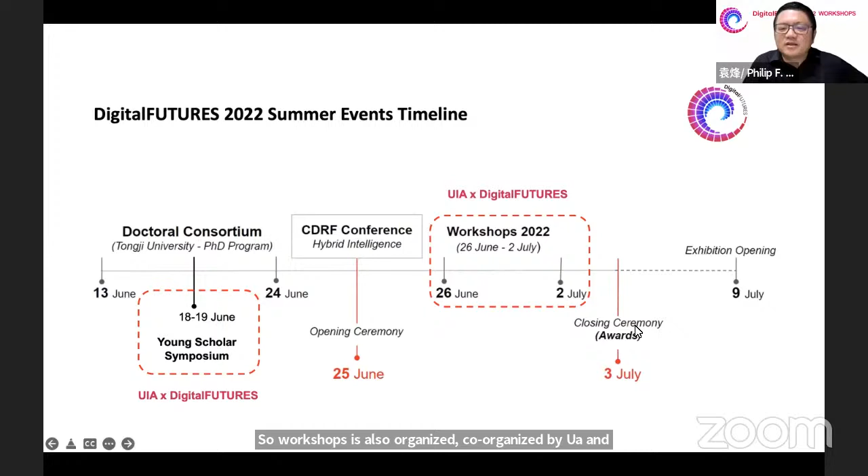So tonight is the closing ceremony. We will announce the DigitalFUTURES Awards, yearly awards, tonight. So this is the number of workshops we organized. We have more than 130. It's 133 workshops around the world, more than 320 instructors from 28 countries and 115 institutions.

So the most special thing this year, actually, we invited different coordinators based on different language channels, including English, Chinese, Spanish, Portuguese, Arabic, Turkish, Japanese, Korean, and so on and so forth. So we have 12 language channels. So these are the volunteers and the organizers. Actually, I would like to firstly thank them for their contribution. So we have English, Chinese, different languages.

So including a lot of familiar names, young professors, architects. I would like to thank them a lot for their generous time and contribution to all the events. And also the organizers, we would like to thank all the officers, including the administrative officers from different universities, different continents, organizer, officer, outreach officer, communication officer, webmaster, conference officer, secretary, treasurer, award committee, and publication committee as well. So thanks to all of you. Without your contribution, there would be no DigitalFUTURES.

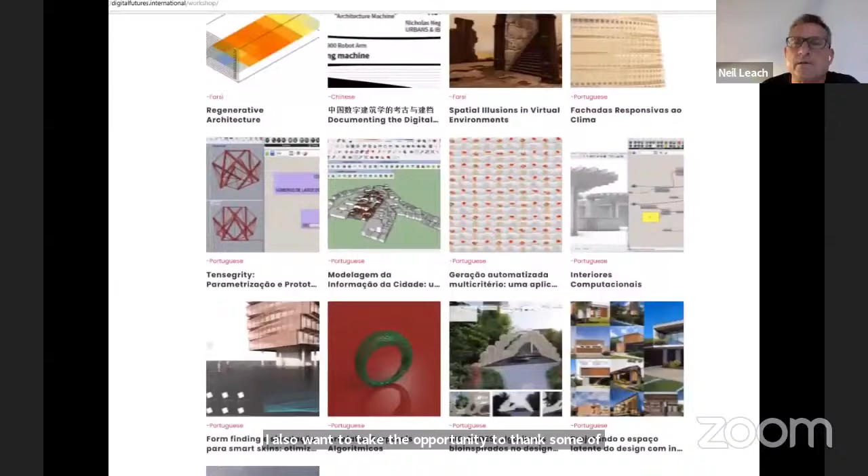I also want to take the opportunity to thank some of those who have been involved in this process. I probably risk leaving out someone. It's always a risk, but I do want to highlight those individuals who have really made a huge contribution to this. The main Digital Futures group has been working on this since January. It's a group that's like the United Nations, it's from all over the world.

And I just want to single out, first of all, three kind of central figures who have been part of everything. Virginia Melnick, who is currently a researcher at the University of Michigan and also doing a PhD at Tongji. She is a veteran, shall we say, of many campaigns, and Virginia is really absolutely central to all the things we've been doing. She's also been interviewing as part of our Legends series. She's interviewed Denise Scott Brown and also Odile Decq, and next week it'll be Liz Diller.

I also want to thank Gustavo Rincon, another one of the three key figures. Gustavo has been central to everything. He's a graduate of UCLA, and he's just finished his PhD at UC Santa Barbara. And it's his enthusiasm and dynamism and optimism that has been really carrying us throughout the year. So thank you, Gustavo.

And the third key member of the triumvirate, as it were, in charge has been Bhavleen Kaur, who's new to the team. Bhavleen is an assistant professor in Mumbai in India. She's also about to start the Doctor of Design program at Florida International University. And Bhavleen in particular has been responsible for setting up our tutorials, a most important part of this last year's activities.

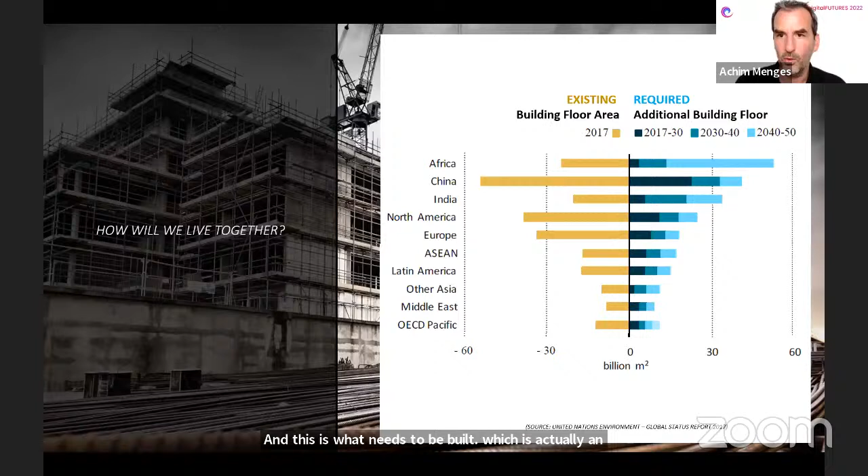What you can see on the left is the UN statistics for buildings existing on the planet today, which amounts to about 230 billion square meters. And this is what needs to be built, which is an interesting statistic also when we look more closely at where these things are going to be built, but there's still a large share in the so-called developed world, but of course also across the globe.

So if we bear this almost unimaginable volume of floor area that needs to be realized in the next 30 years, 230 billion square meters, in mind, and we realize that more and more of the detrimental environmental effect that building practice has on the planet is in the construction process itself, so in building construction and not building operation, we think that we need radically different models for how we build.

And this is what we intended to reflect on with Maison Fibre, an alternative model for how we can, on the one hand, accomplish this grand societal challenge of building a lot in a very short amount of time with a different model of design and construction, which is based in biology, where we see very different ways of building based on principles like morphological differentiation and anisotropic materials, and of course, the integration of form, material, structure.

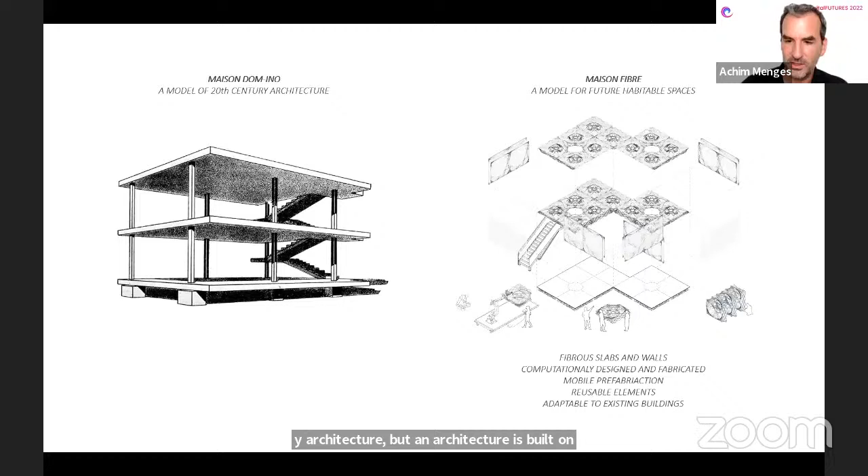We have investigated that for many years across many different projects. So we see Maison Fibre as a development step in this long lineage of investigating fibrous tectonics and fibrous construction. But what we were really interested in this time is not so much designing a project, but designing a model. In the same way that we can say Maison Dom-ino was a model for 20th century architecture, but an architecture that is built on concrete construction, with isotropic materials, with no morphological differentiation.

Maison Fibre was meant to be a model for rethinking this, and also as kind of stimulation. So by no means is there a claim that we will solve these big challenges with something like Maison Fibre, but we urgently need alternative models, and this is what we wanted to provide as a stimulation for the audience.

One aspect that is critical, of course, is that we utilize digital technologies to enable this. So the entire project is actually based on a very humble, small robotic platform that could build a human habitat in a very short amount of time, based on a kind of differentiable module that then is basically designed to become a habitat.

So what we did for the Biennale was basically just covering the same floor area as Maison Dom-ino, but integrating the existing building stock of the Arsenale, these two big columns, as part of the load-bearing structure, also acknowledging that, of course, building stock and the extension of building stock is an important future aspect. And then we showcased how dealing with fibers, you have to design every single centimeter of the more than 150 kilometers of carbon and glass fiber that are in this project.

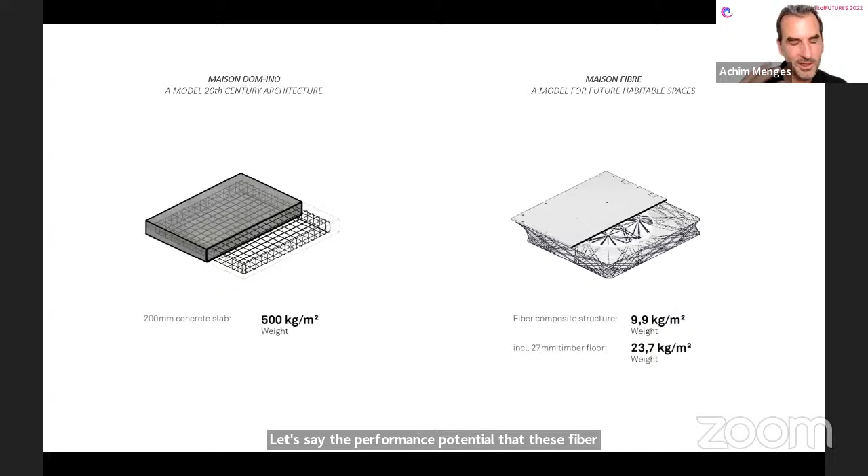Maybe just as a quick summary, what we can also see is that with this different model of constructing, we can actually build 50 times lighter than the role model of the 20th century. And of course, that's the kind of improvement that we need in order to tackle those societal challenges. So 20 times, 50 times lighter, less material. And I think what you can see here is that really it's a truly fiber structure. So all the floors, everything is only built from fibers.

And the most important aspect is, of course, that this is not only a technical accomplishment, but it's also, I think, heralding a new material culture that is very different than the 20th century architecture that celebrated an aesthetic that is based on a very different logic of isotropic materials.

So here you can see Maison Fibre in the Arsenale, the two stories with the two cantilevering sides. There was, of course, a fully inhabitable upper floor, which also housed our material culture exhibition that you can see here on the left. And the main idea was actually to stimulate the visitor's mind to a radically different way of building, also basically putting the walls in the central doorway that actually carry the upper floor, to give them the importance that we feel they had for this project.

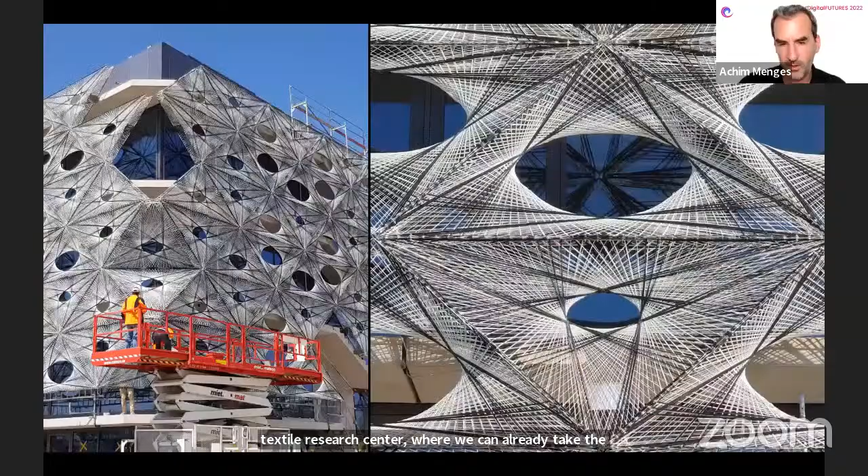So with this, I would like to wrap up this short presentation. I think what is really interesting for us is also that this model was truly instrumental in, for example, a building that we're currently realizing, which is a university building, a textile research center, where we can already take the next step of implementing this innovation on the full scale. This is currently on site and will be finished actually this October.

So thanks a lot for awarding Maison Fibre the award. We are truly honored by this, and I would just like to wrap up the presentation by a very short video, which is a bit more atmospheric than what I could deliver on a Sunday afternoon. Thank you.

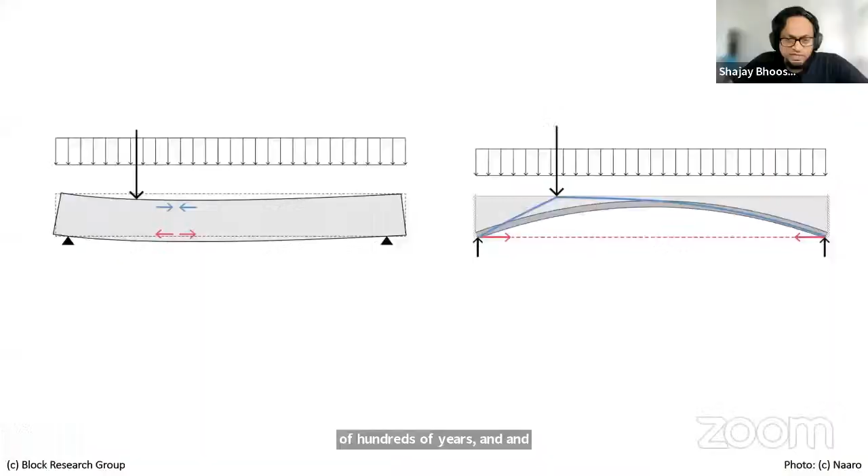We probably don't think of ancient masonry structures as high performance structures. In fact, they're extremely high performance and high endurance, evident by the fact that they've lasted hundreds of years. Philippe Block and the Block Research Group have been pioneering the adaptation and extension of these principles of masonry design to meet the challenges of the construction industry, particularly conservation of material. They've shown time and again that by including these geometric principles of masonry design and upgrading them through computational design, we can go a long way in reducing our material footprint.

Striatus tries to extend that principle to 3D concrete printing. In other words, Striatus is a masonry structure with artificial stone, or 3D concrete printed blocks, seen as artificially printed synthesized stone. And of course it incorporates some of the ancient techniques of stereotomy, and it's aligned with the history of Venice and all the arch bridges of Venice.

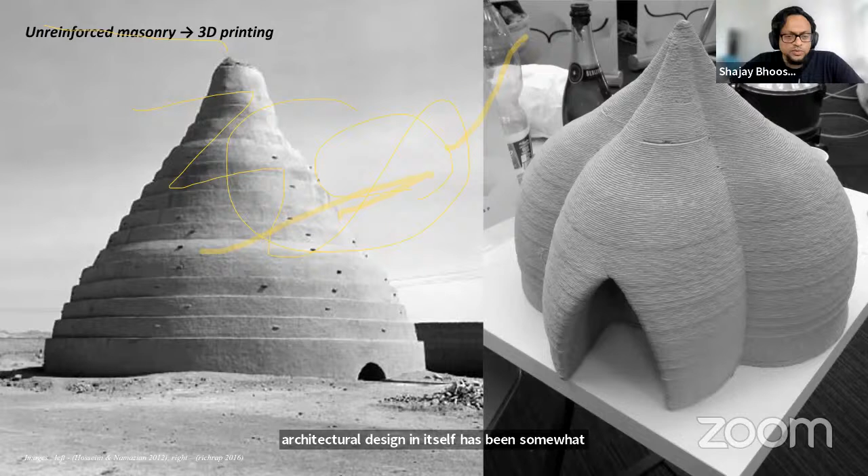So that's another aspect we wanted to address, that unreinforced masonry can be used as a deep analogy to 3D printing, in the sense that masonry is basically additive manufacturing with large scale blocks. And so we can think of 3D concrete printing as a kind of miniaturized masonry. And more importantly, we can also adopt and adapt techniques of design and construction from masonry to 3D concrete printing.

And in particular, in this project, we wanted to adapt so-called pitched brick or tilted plane masonry, and the way they have developed spatially coherent blending of brick courses, each course slightly different from the previous, thereby giving us the curvature. And also these historic techniques of cross-vault construction, which also rely on inclining the plane of laying the brick courses, each course being slightly different from the previous one.

And so these are the background goals that we tried to integrate into a kind of coherent computational design and construction pipeline. And there were three particular frameworks that were constantly in interaction. One was the Compas framework from the Block Research Group for structural design and structural evaluation and so on. And our own framework at Zaha Hadid Architects, called Z-Space, and Incremental3D. They had their own framework for developing the fabrication side of things. And these three were seamlessly always in communication with each other.

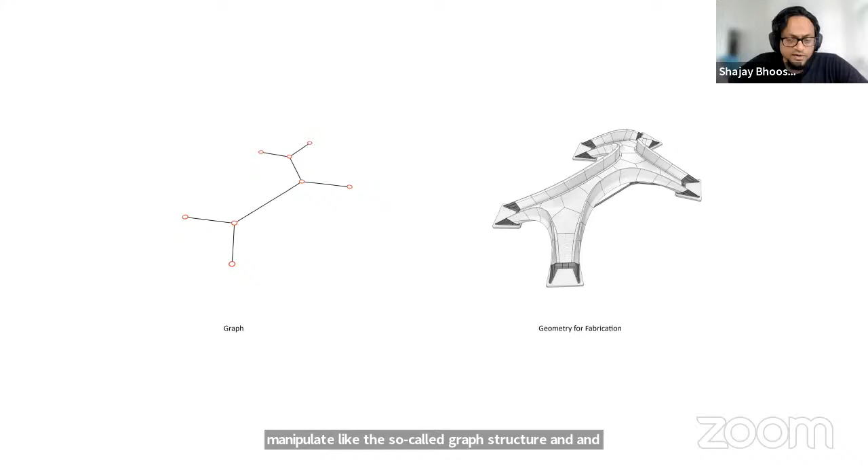So the project was executed over 6 months in the height of COVID restrictions, and the project teams never actually physically met until the project was completed. And so that's another feature. And what we wanted to set out was a design and fabrication friendly framework. So the designers are free to manipulate the so-called graph structure, and all the things needed for construction are carried out in the background, including the stereotomy and preparation of the 3D files and printing files and so on.

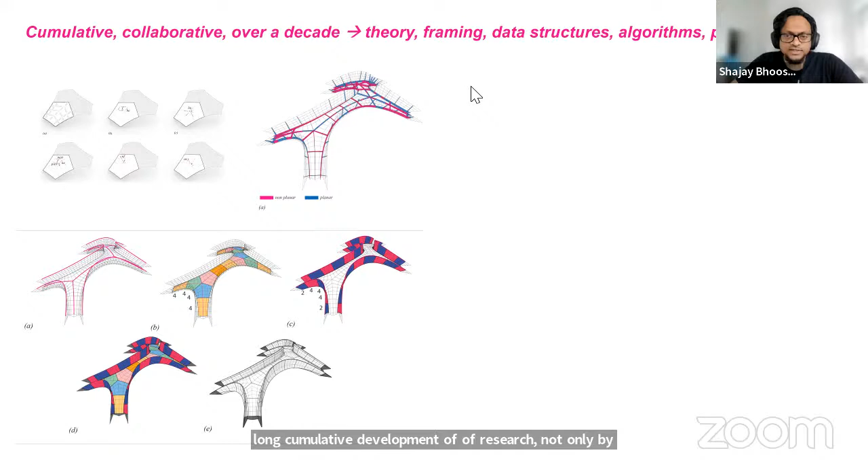And the first and foremost of this is, of course, Philippe Block's seminal thrust network analysis PhD from MIT in 2009, and several others that came after that. And also an important seminal precedent is the Armadillo Vault, as I previously mentioned, and also the PhD dissertation of Matthias Rippmann, which was very, very influential in the development of RhinoVAULT and everything else that came after that.

And to that, we also made some humble contributions, first and foremost identifying and articulating the relevance of masonry to 3D concrete printing, and also developing some new methods borrowed from the field of so-called optimal transport, and then using that to create spatially coherent print path generation and other such incorporation of

printing constraints. And likewise, the structural design, evaluation, and verification in itself is another long list of prior work that contributes to the success of this project. And similarly, also for 3D concrete printing, material testing, and so on.

So just on the shape design aspect, again, to reinforce, the key innovations have been to have this masonry logic apply at two different scales. One at the scale of the block itself, that they are arranged in a compression-only layout. And in addition, to align the print paths as orthogonal to the force flow or expected force flow as

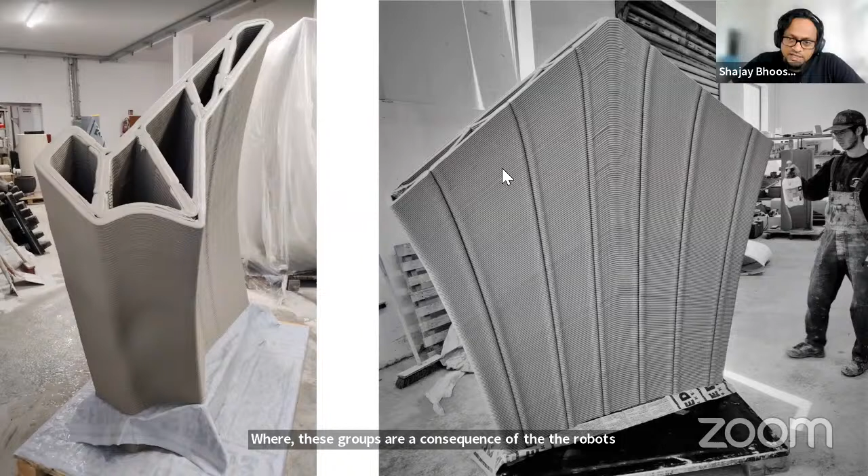And in addition, it also gives us this striated language where these grooves are a consequence of the robot slowing down to make a turn, and all these inclined planes are also precisely calibrated to be able to align the material perpendicular to expected force flow. And so this also gives us the striated tectonic.

And to achieve that, there's some amount of resampling and innovation needed at the print path generation. On the left here is what would happen if we just naively cut up a geometry. And on the right is when we calibrate and coordinate every layer to every other layer, where the printing starts and where it stops, etc.

So in conclusion, the project is a kind of homage to a collaborative design mindset, where multiple stakeholders, engineering, construction, fabrication, design, all come together at the early stages and remain collaborative all the way to construction. And this is, we feel, an important contribution to the discourse, that we are building bespoke tooling,

not focusing on the existing tooling, because that one is focused on a 20th century way to produce architecture, which relies on drawings and so on. And it is not at all aligned with digital design nor robotic fabrication. And more importantly, everything is white box and fully transparent, and it is collaborative precisely because it relies on a common language of geometry and code, and not only on numerical calculations.

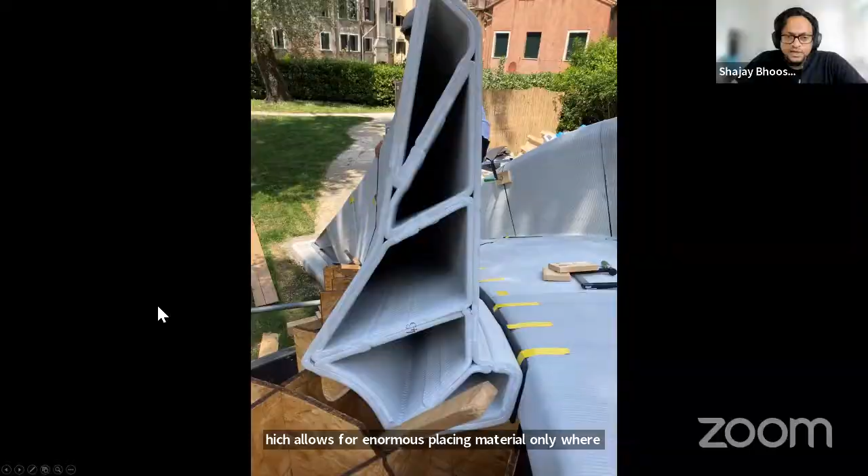And likewise, we want to combine these ideas of funicular shape and appropriate stereotomy and the striated language with 3D concrete printing, which allows for placing material only where it's needed, to be able to realize some of these goals of circular and sustainable design, such as reduction of material, reuse of the printed blocks and recycling

of them. In fact, this bridge has been fully dismantled and crushed, and the same material is being used as a source for the next batch of printing for the permanent bridge, which will be located in Lyon in France. Again, we are hoping to complete that by the end of October.

So this is the disruptive outlook that we hope to enable through this prototype bridge that we showcased in Venice in 2021. And I will leave you with this video, which summarizes some of the contributions.

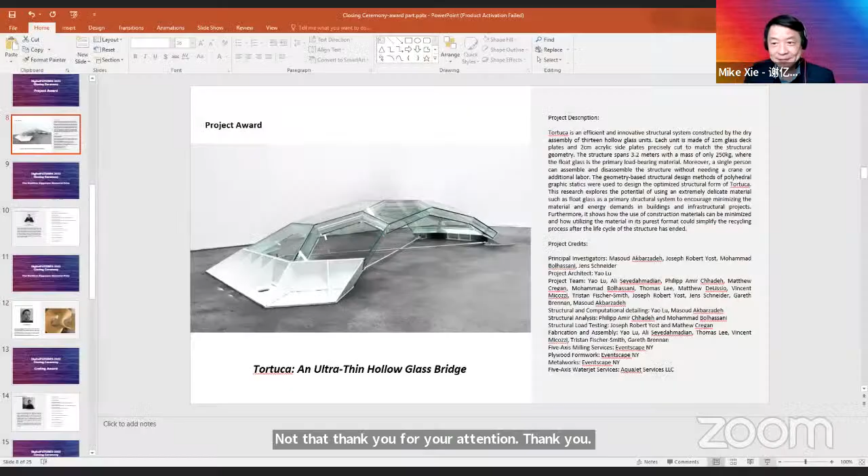The third award-winning project is entitled Tortuca, an ultra-thin hollow glass bridge. This is designed by a team led by Professor Masoud Akbarzadeh. May I invite Masoud to make a short presentation.

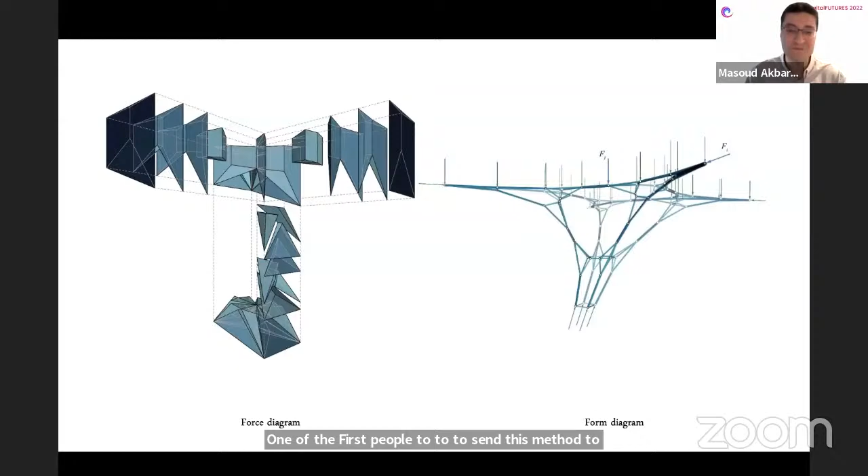Next, please. So we have developed multiple techniques and methods that allow us to design the force flow in three-dimensional space and distribute the construction materials using these force flows to create a variety of different spatial structural forms. So in this case, we are working with the methods of polyhedral graphic statics that I had the honor to be one of the first people to extend to 3D at ETH Zurich under Professor Philippe Block and William Baker. Let's move to the next.

So we worked with different materials and tried different geometries. For instance, in this case, we have created concrete structures to show the efficiency and the minimization of the material. Next, in this sample, we showed how a 12 kilogram concrete structure can take around 24,000 kilograms of load, which basically proves the efficiency of the method and also the type of structural system we work with. Please, next.

Yes. So we tried to apply this method to various structural systems and work with a variety of different construction techniques. For instance, in this case, this is a node-based assembly. It's a compression body held together with the tension ties at the top and bottom and the self-weight of the top glass structure that keeps everything in equilibrium. But also we investigated a lot into the methods of assembly and the connections of these systems. In this particular case, the relative density of this structure is very close to the relative density of human bone, to show how you can efficiently distribute the material in three-dimensional space.

Next. One of the major projects we initiated in 2018 was this glass bridge. The project that has been selected for the award today is actually a proof of concept for this method of construction. So what was really at stake here was that we intended to use a highly brittle material like float glass. This is not a security glass, it's like a window glass. And the main objective was to eliminate any type of intermediate material like steel, and just use pure glass to transfer the forces. But most importantly, we wanted to significantly reduce the self-weight of the structure.

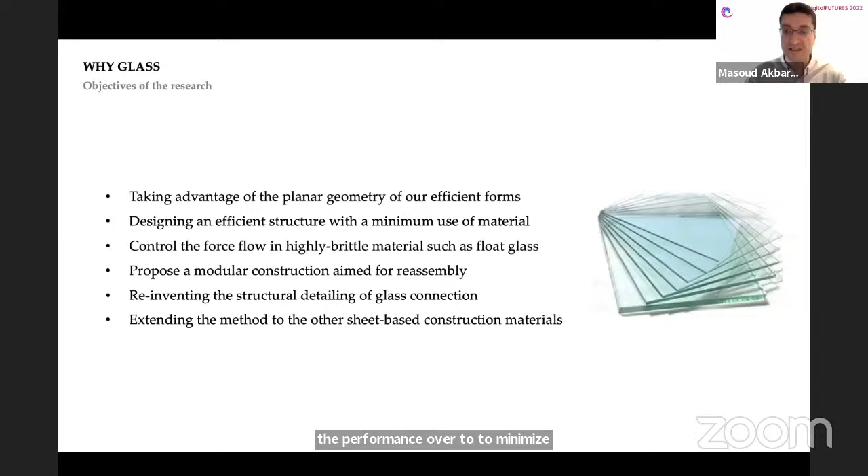Let's move to the next. So one of the main challenges that we had was that because we were rethinking the method of construction, the way that these materials should work together, the way the glass panels, those really thin 1 centimeter glass panels, are going to be put together to create a construction module, we did not have any understanding about the mechanical performance of our building units.

And also there was not a very, I would say, well-known numerical workflow to validate the experimental results. And we did not have any research on fabrication, assembly, pre-made assembly techniques to move forward. So that, in fact, formed multiple stages or multiple thrusts of this research to begin with. And obviously, if you have all these things developed, we can actually move forward with the larger scale construction. Let's move forward.

So from here, I'm going to give it to Yao Lu, who is my second-year PhD student, and he can walk you through multiple stages of this research that made it possible to arrive at the point that we are today. Thank you, Masoud, for the introduction.

I'm going to take it over, and I'm going to start with providing some history and detailed context of this research project. So in one of our research papers, we proposed this construction module called hollow glass unit. And then we would like to learn something about this specific construction methodology. So this construction module is made of 1 centimeter annealed glass, just the regular window glass. And then all the edges are cut using 5-axis water jet cutting techniques.

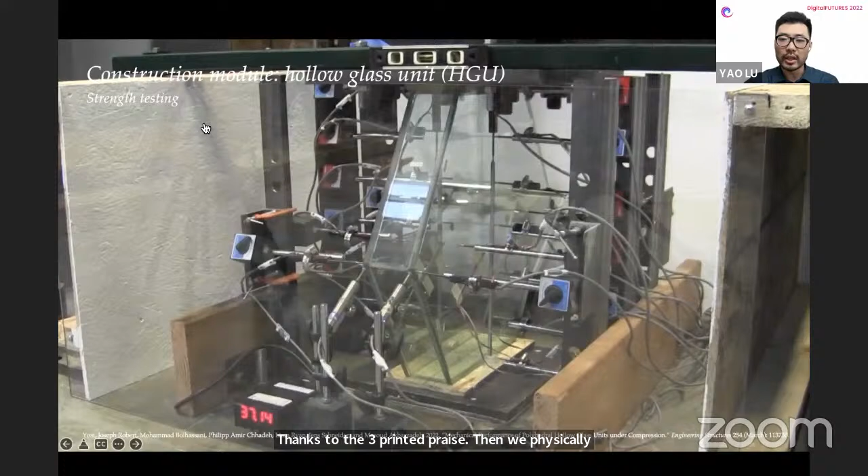And all the parts will be bonded together using 3M VHB tape. The assembly of the hollow glass unit could be fairly easy and precise thanks to the 3D printed PLA jigs. Then we physically tested the mechanical performance of this hollow glass unit, and it showed very impressive load-bearing compression capacity.

As Masoud just mentioned, we've shown that it's totally possible to make a 10-meter pedestrian bridge using this construction unit by leveraging the compression capacity of the hollow glass units. But we still need to deal with the detailed design issues, the fabrication constraints, and also the assembly logic issues. And therefore, we introduced this smaller scale prototype called Tortuca.

Tortuca is actually the Latin origin of the English word tortoise, and we hope this name could help us explain the design thoughts behind this project, not only because of the visual similarity, but also due to the lightweight and structural efficiency of this biomechanical structure.

So the design is achieved by polyhedral graphic statics. We first deal with the single layer funicular form. In this stage, we think about the topology, the geometry, also the rise of the bridge. And then we quickly move to the double layer bridge just by simply subdividing the force diagram into 2 layers. And after getting this base geometry, each of the polyhedral cells will be materialized into one hollow glass unit, which has a top deck plate, a bottom deck plate, and several side plates.

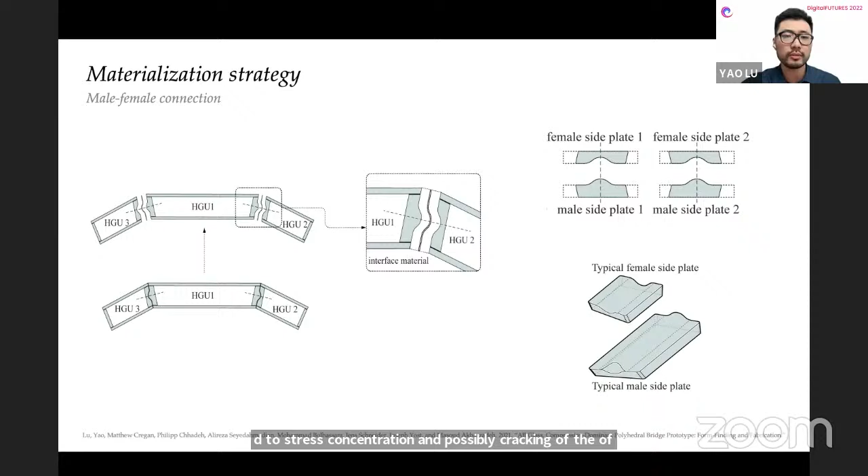One other key element in this connection detail that I want to point out is this little piece of plastic. It's the interface material between the neighboring hollow glass units. It's to separate the glass-to-glass direct contact, because the direct contact between glass will lead to stress concentration and possibly cracking of the glass part. And here is the test unit that we made, and you can see all the side plates are made of cast glass and 5-axis water jet cut.

There are several issues that we have found through this testing process. First of all, the whole casting process is very energy and time consuming. And more importantly, it doesn't perform well because some of the connections will open up under asymmetrical loading conditions.

And therefore, we shifted to another improved connection detail called butterfly locking mechanism, which is also what we used for the final construction. It has a locking strip made of acrylic, and also the channels on the 2 hollow glass units that it is trying to bring together.

So the side plates with the channels will be very difficult to make using cast glass and water jet cutting. So we decided to use acrylic and 5-axis CNC milling instead of casting. And as always, we bound all the parts together using the 1 millimeter thick 3M VHB double-sided structural tape.

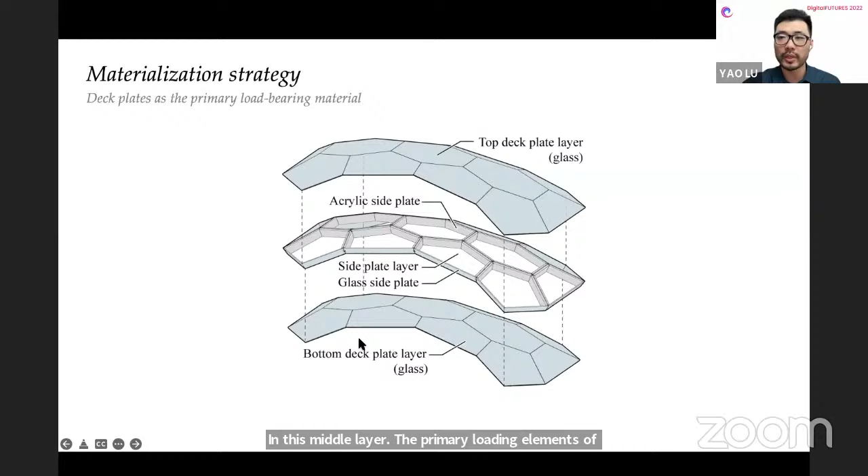Although we introduced some acrylic parts, as you can see in this middle layer, the primary loading elements of this whole structure are still the 2 continuous layers of the deck plates. Then we validated this improved connection mechanism using a simplified numerical model, and it showed clear improvements. The entire structure was also simulated under its self-weight, and the maximum deformation is below 0.3 millimeter.

Here's an image that shows the detail of the locking mechanism, and this locking strip can be removed during the assembly just simply by a small metal hook. Here is another image that shows the locking mechanism with the interface material. So the compression coming from the deck plates will be passing through this interface, and therefore the material selection of this part will be very critical.

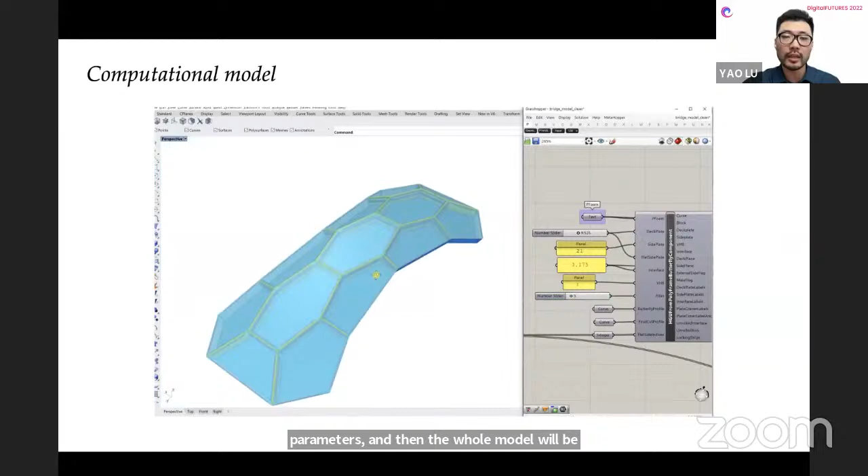Before moving to the fabrication, we also implemented this parametric model where we can change the design parameters, and then the whole model will be updated instantly. It helps a lot with the design adjustments and also fabrication management. Here we have a video that records the entire fabrication and construction process.

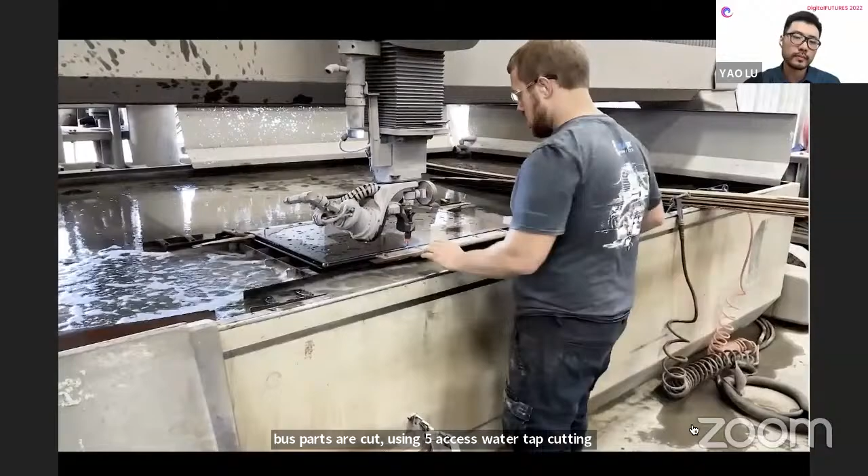All the glass parts are cut using 5-axis water jet cutting. The water jet cutting can be fairly precise, and according to the fabricator, the error is below 0.1 millimeter.

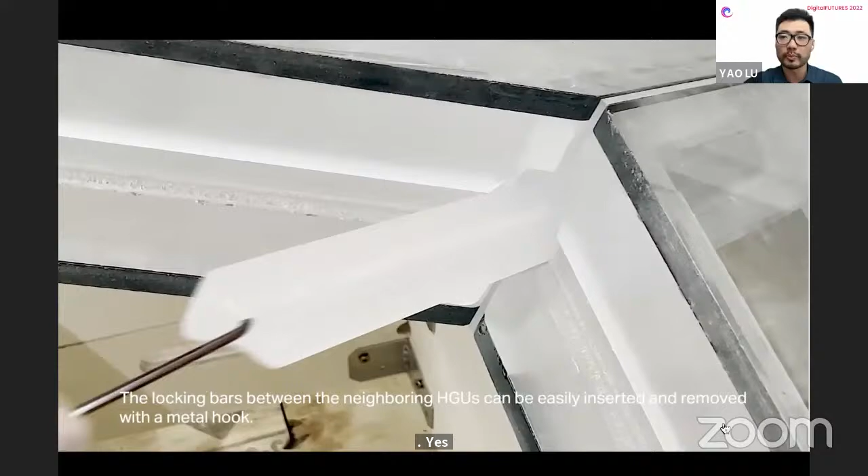The construction of the hollow glass unit can be handled by just one person. And here we're actually showing the largest module in this whole bridge, and it weighs about 30 kilograms and can be easily handled by one person. The assembly of the whole bridge can also be done just by one person due to the lightweight of the whole construction system. After all the units are in place, we can start removing the formwork, and the structure will be standing on its own.

Okay, as a conclusion, we made a lightweight multi-layer funicular structure using 1 centimeter thick annealed glass. And this proposed technology not only works for annealed glass, it can also be extended to almost any other sheet-based materials. The modular construction allows for easy disassembly and recycling of the structural materials. The lightweight construction allows minimized labor, formwork, and their costs.

And last but not least, this project is still a work in progress, and we will have some physical testing at Villanova University in the facility of our collaborator, and we'll be happy to share any engineering data once the test is finished. And thank you for your attention.

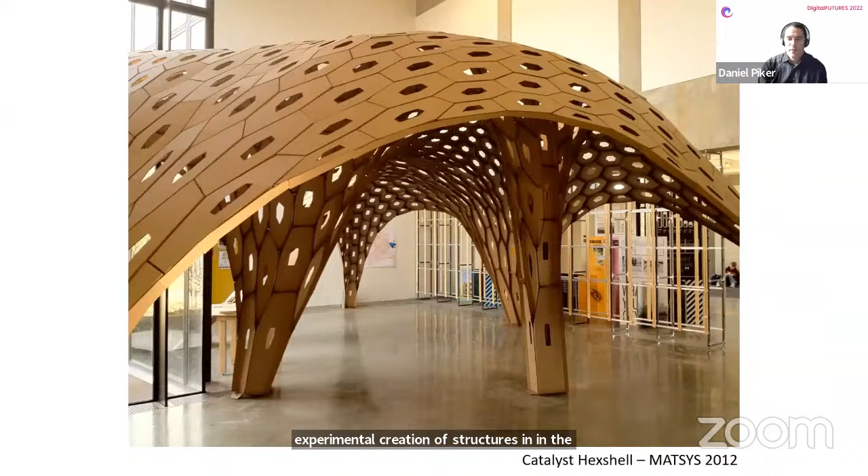And form finding has a long history, obviously, from before computers, in the work of people like Gaudi and Isler and Frei Otto. And the intention was to enable some of the same kind of experimental creation of structures in the computer. One of the very first applications of it was in funicular and catenary structures. But over time, the remit of it expanded a bit to tensile structures, one of the classic applications of form finding. These are early examples of use of it from the community.

And as time went on, I continued to develop and try and improve these tools, sometimes getting as close as possible to real world physical simulation. And I was always drawn to the more playful applications of this. This is an example of combining tensile and inflatable structures.

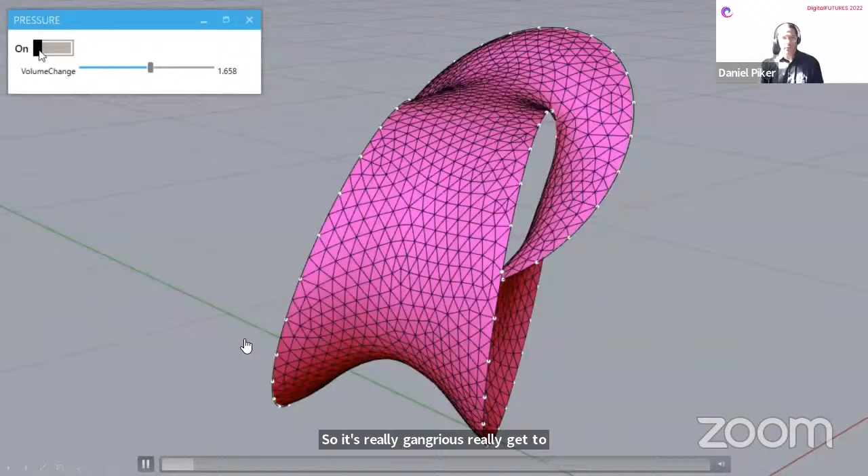And the importance of form finding really is that when we set out to design a shape in the computer, if it's something that involves large deformations like an inflatable, you can't just say, here is a cube and I want the balloon to be a cube. You have to design in interaction with the physical shaping processes. So Kangaroo is really geared towards enabling that kind of real-time or near real-time feedback as you shape the design. In some ways, similar to what would happen with physical models, but also extending it in digital ways that aren't always possible, aren't always convenient to do in the real world.

So yeah, bending simulation was actually one of the very first things before Kangaroo was Kangaroo. It started as an exploration into understanding bending behavior, particularly drawing on the work of Chris Williams from Bath and his work on dynamic relaxation. And this has led to the approach used in Kangaroo and applications to actively bent timber grid shells, in this case a project in Romania with some people from Bath University.

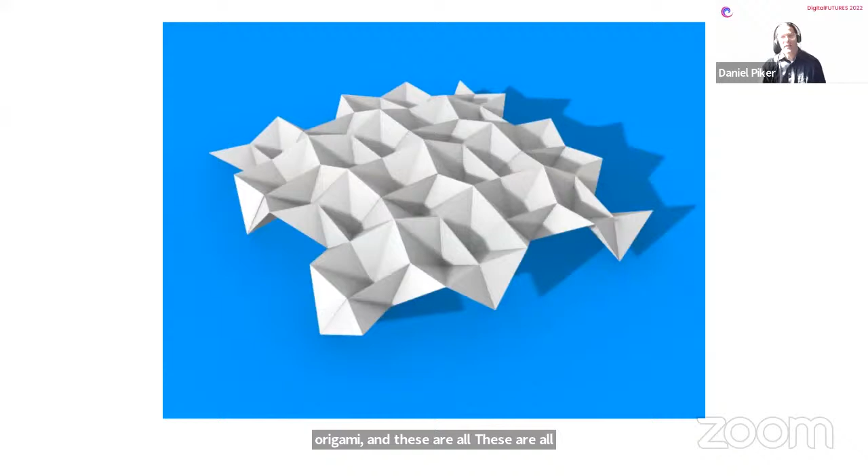And from there it started to diverge a bit more from the classical applications of form finding, extending to things like origami. These are all different systems that can be approached through an energy minimization process. I did some work on this for a company called RoboFold, who at the time were using robots to fold sheet metal. Origami is something that's very easy to do by hand, but to repeat that motion on a large scale with the robot, we needed to be able to simulate it in the computer.

And this interest in working with sheet materials has continued. This is some more recent work with developability. This is based on some relatively new research on taking meshes and turning them into developable surfaces. So it was taking a mesh in Kangaroo and developing an energy for it, which adds creases and flattens areas in order to make it something which can be made out of flat sheet material.

Also, as the stability and speed of the solver was increased, I found it was possible to apply it to constraint modeling in the sense of mechanical models, because it can still be seen as an energy minimization system. And if you can converge fast enough, you can maintain the rigid parts and their connections to each other. This is an early demonstration of those improvements in the solver.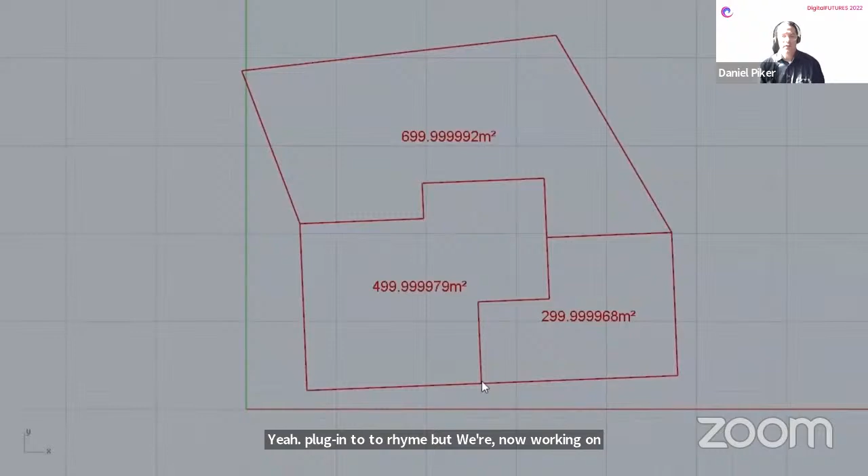And work is continuing on this now at McNeel. What you see here is in Grasshopper, which is the parametric plugin to Rhino, but we're now working on adding these types of constraint solving into Rhino itself, so it's usable for more drafting type applications.

Also, in terms of fabrication, often it's important to simplify geometry to something which can be more easily manufactured. One of the early examples of that I worked on was planarization, taking meshes which have faces which are twisted and turning them into flat panels that can then be fabricated out of glass and steel, for example. Some of the earliest adopters of these tools have been students and people making pavilions, and there have been several nice examples using Kangaroo.

But it then grew and has been applied in larger scale architectural projects, like this work by Thornton Tomasetti for this stadium, which is now built. And at some point in this journey, I joined Foster and Partners in the specialist modeling group. This was one of the first projects I worked on there, planarizing the panels in one small part of this. It wasn't that the whole thing involved a lot of form finding; there was just one area where we simplified the fabrication through this planarization process.

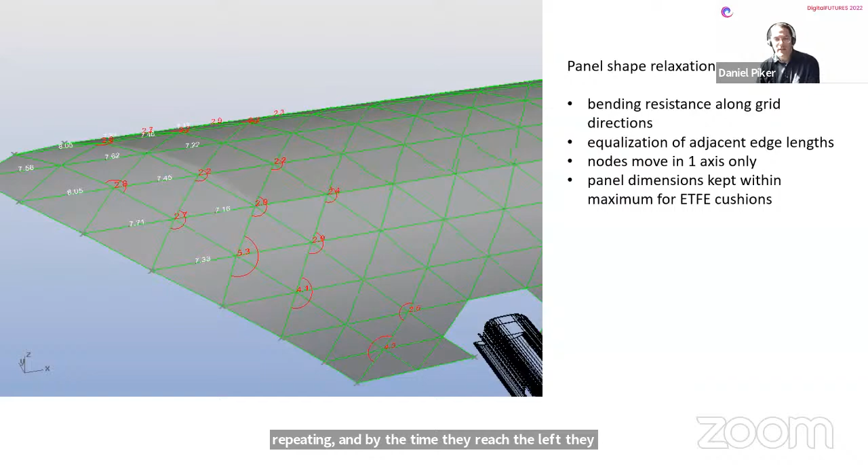So the triangles on the right side of the image are repeating, and by the time they reach the left, each one is different from the one next to it. This was done through a process of setting these constraints and minimizing an energy based on the angles, so that we could stay within the fabrication constraints for the ETFE and also manage a smooth transition.

A more recent project from Foster's shows a typical application where we would use Kangaroo: panelization, making facades and roofs, in this case again with planar panels, and managing smooth transitions between sometimes challenging boundary conditions.

One of the things I've most enjoyed is that it's been applied in a huge range of fields, far beyond what I ever expected, even by people outside of architecture. This is a recent preprint paper from biology where they used Kangaroo for understanding some of the behavior of kidney growth. More examples of its use: this same idea of taking challenging curved or complex boundary conditions and making something which seamlessly and smoothly interpolates between them.

One theme I've returned to many times is circle packing, which is used in quite a broad sense. There are many different types of circle packing, one of which was quad-based circle packing with tangent circles. I tend to try and follow the latest research, and whenever there's some geometric property which sounds interesting for fabrication, I try and develop ways to include that as a new energy within the system.

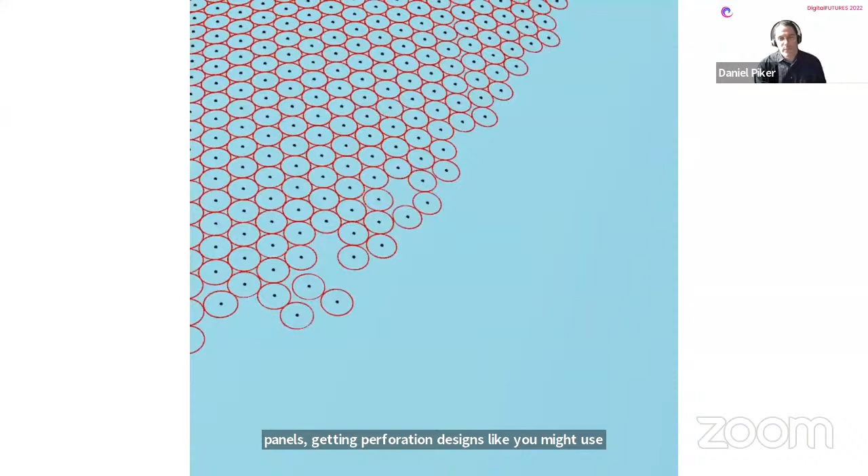And this is an example of where, although it's physically based, you can abstract it and add constraints or physically based behaviors that you wouldn't necessarily encounter in the real world. So here there's physical collisions between those circles, but also maintaining given symmetry constraints. So you can say, I want to distribute these points with the symmetry of a cube or an icosahedron, and also have them non-overlapping.

So this was actually an exercise in looking at golf ball dimple designs, which turn out to be surprisingly more complex than you might first imagine. They're not all just subdivided icosahedra. Yeah, this is an optimized version of an existing golf ball design, which has tetrahedral symmetry in this case.

So one of the aims in the form finding that I'm doing is often about finding, in a sense, canonical or ideal forms where the inputs of the designer, and in this case, the discretization used... When we relax the mesh, sometimes if we have a bad mesh to start with, then we can get a very asymmetrical result. So one of the other large directions of research I've gone in is improving the mesh independence of these results.

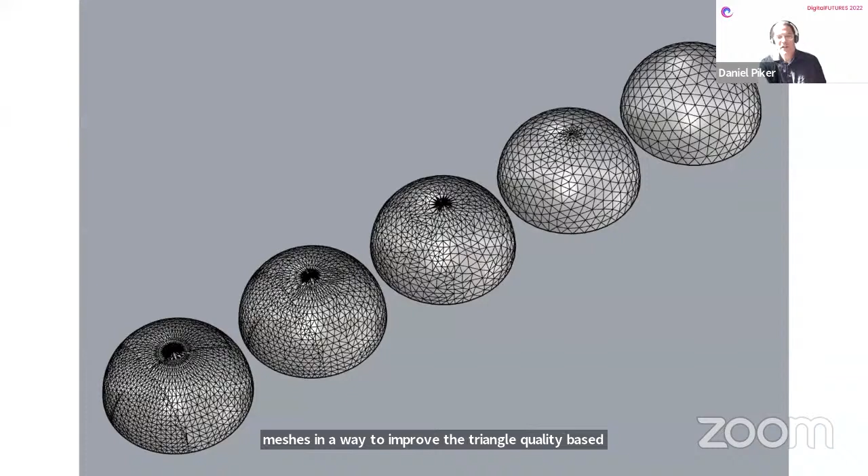So that's why I grew very interested in this idea of remeshing, which is about changing connectivity of meshes in a way to improve the triangle quality, based on these papers mainly. And that lets us take something like the mesh on the left and iteratively improve it to something like the one on the right, which has applications also for generating analysis models and other things.

But in terms of Kangaroo, the interest in it was that this enables much larger deformations, so we can change the boundary conditions much more dramatically than we could if we kept the connectivity of the mesh fixed, which has allowed this sort of thing. And in this example,

sometimes the results are surprising, and I always enjoy when form finding can give you results completely different to what you're expecting. So given a helicoid mesh, it actually turns out not to be stable, and it wants to jump to one of two different solutions. Or in this case, Costa's minimal surface, actually, if you relax it as a soap film, it will collapse and disconnect.

And then combining these themes of circle packing and remeshing, we can get circle packings which maintain their tangency and also adapt their connectivity at the same time.

So this idea of finding canonical forms, I think topology is one of the clearest examples of this. Like for a given knot, you can draw it in many different ways, but we can actually ask the computer to find what is, in some sense that we define, the best way of placing that topology as a 3D shape. So here the user draws something very roughly with the given topology, and in this case, it's finding an alternating crossing diagram for that knot, and then it relaxes to find an energy minimizing form.

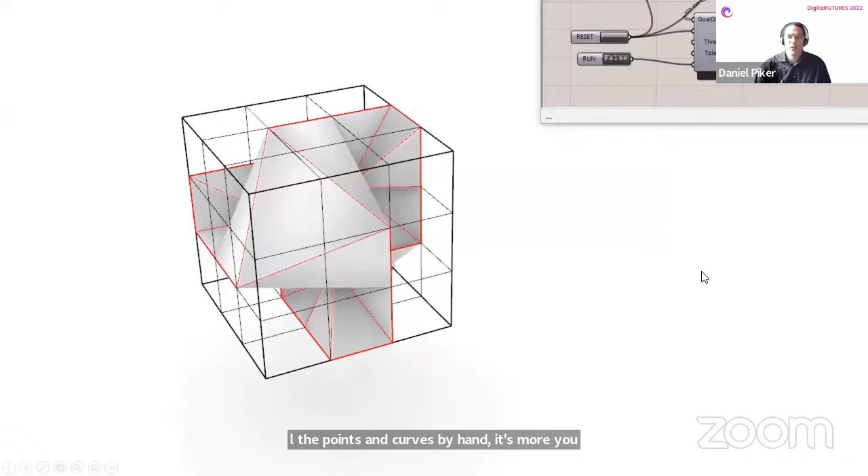So it changes the role of the designer a bit in that instead of actually drawing the shapes and placing all the points and curves by hand, you design by setting up the conditions you want to be optimized for and the things you want to stay fixed or constrained, and then let the computer, given whatever energies you've set, find its way to a minimal energy form.

So taking more complex knots, we can always relax them to get to this minimal energy form. And then from this, I've also been doing a lot of generating surfaces on knots, and this is some work on solid angle surfaces where we can take a knot and generate a surface on any knot, in this case using some implicit surfacing techniques, and that has really opened up an exciting new world of forms that I've been exploring a lot recently.

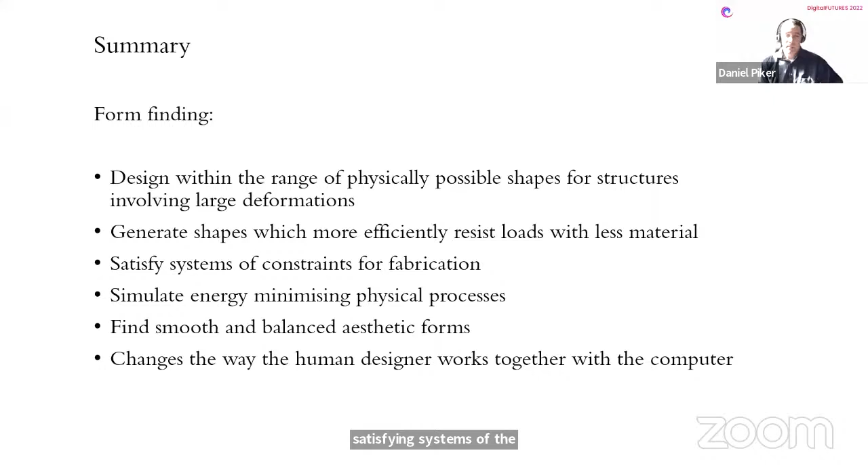So that's an overview of the kind of things that have been going on over the last, let's say, 12 years now. And form finding can be used for a lot of different things. It surprised me over time how many different applications it has. Obviously working within physical constraints of things that deform a large amount, and very importantly, minimizing material use and satisfying systems of constraints, or transitions between given boundary conditions.

And really at the heart of it, to me, the important part is it changes the relationship between the designer and the computer, and it becomes more of a collaboration where you're setting up the conditions for the design rather than always shaping it so manually yourself.

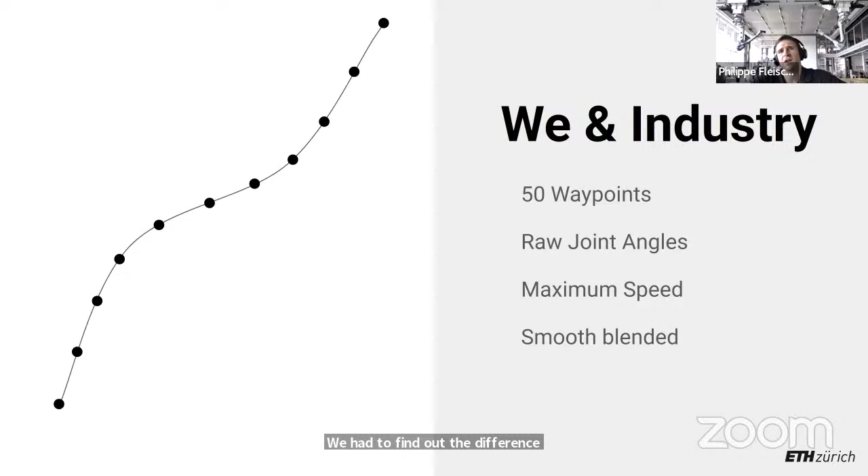My focus went to one challenge: the faltering robot motion in automatic mode. To investigate it, I needed motion. Therefore, I selected a path with 50 waypoints in a format of joint angles with the maximum speed and with a smooth blend. We had to find out the difference between us and the industry. Therefore, we did the following tests. First, our online communication at this time, sending the values out of Python code.

And second, the potential of an industrial robot, the same path implemented in the native robot code language. The result of this test was clear. We needed better communication for the future if we want to use the full potential of industrial robots in our research.

Together as a team, Mike, Gonzalo, and I started to work on a solution for this challenge. I'm really proud to work and learn with those two. Each of us comes with more than 20 years experience in his domain. Our goal was to use the full potential of the RFL robot: the custom gantry from Güdel with 12 axes and 4 ABB robots, IRB 4600 2.55 with 40 kilo payload.

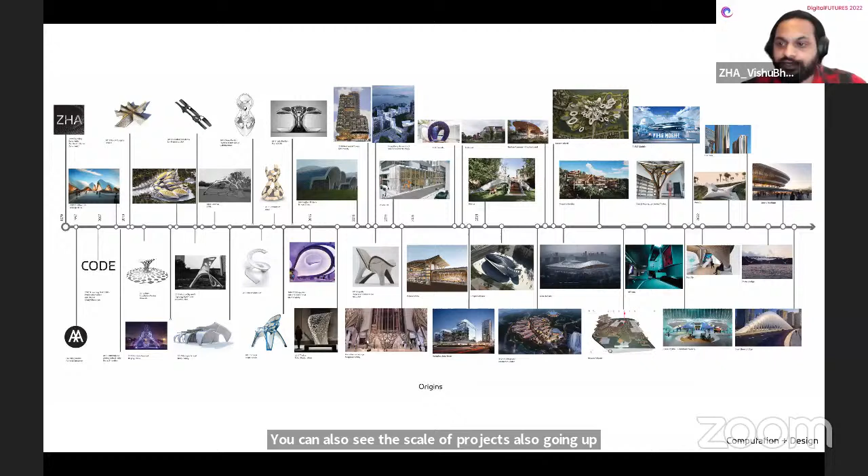As a group, we have grown over the last few years. You can also see the scale of projects going up. When we started, we were doing project-independent research and trying to build a network of collaborators. And this research, as it matured, is finding applications in large-scale projects such as metro stations, stadiums, master plans, etc. And we are also delivering projects which are now coming in with the new buzzwords, which are metaverse and machine learning.

Our research sits at the intersection of what is valuable to architects and designers and what computation can do, or what more recently is replaced with design technologies. As Daniel was also showing previously, we draw a lot of our precedents from industries such as mathematics, computer graphics, and the gaming industry, whilst also looking inward at the AEC industry, looking at the advances in structural form finding, like groups like Block Research Group and Masoud, who are also a part of the call here, and looking at digital fabrication technologies, and more recently trying to embed sustainability and statistical or machine learning aspects into it.

I lead the computational geometry research within the group, and more specifically looking at architectural projects through architectural geometry. It is to make visible in shape and stylistically heighten some performance criteria such as fabrication, structure, environmental performance, etc. As Patrik would call it, this is called tectonism, a subsidiary style within parametricism. It shares a language of geometry. It becomes a source of truth as well as an interface between the different stakeholders in an architectural project.

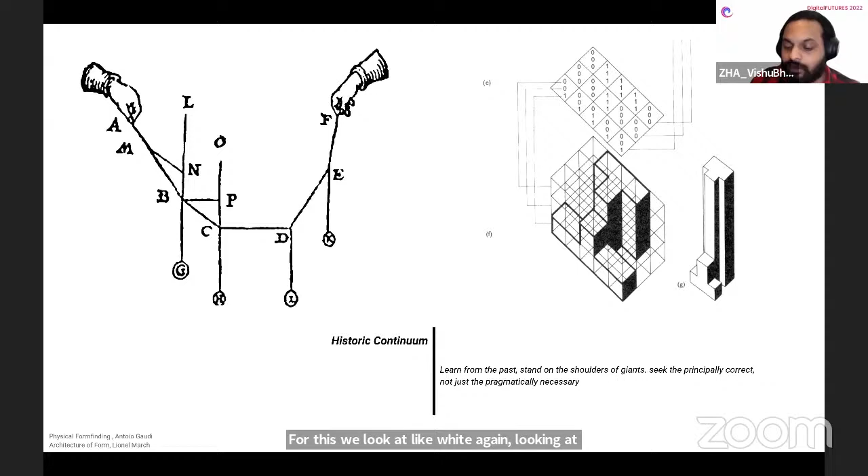The research seeks to have a historic continuum and stand on the shoulders of giants. For this, we look at mathematicians such as Lionel March, or also at Gaudi and other seminal figures, even like Frei Otto, etc. The goal of computational geometry is to augment designer intelligence, trying to develop tools which will aid designers to design better, and trying to inform design at a very early stage rather than rationalizing it at a later stage.

To go over these projects and avenues in terms of computational geometry, I'll look at these five avenues: academia, technology demonstrators, which are done through interdisciplinary collaborations, how it's getting applied into architectural projects in the more recent past, how computational geometry affects the metaverse and cyber-physical spaces, and also the framework which is powering all of the ones above.

In our academic setups, we have a lot of things to do, like learning by doing. We follow this paradigm, which is following in the footsteps of Josef Albers from Bauhaus. And over the years, through Zaha Hadid Architects, we have done quite a lot of workshops, currently 45 to 50 plus, of which 20 plus workshops have been in design to fabrication. These 10-day workshops look at the application of our computational tools, but also application in fabrication, how the design tools are aligned with the fabrication tools.

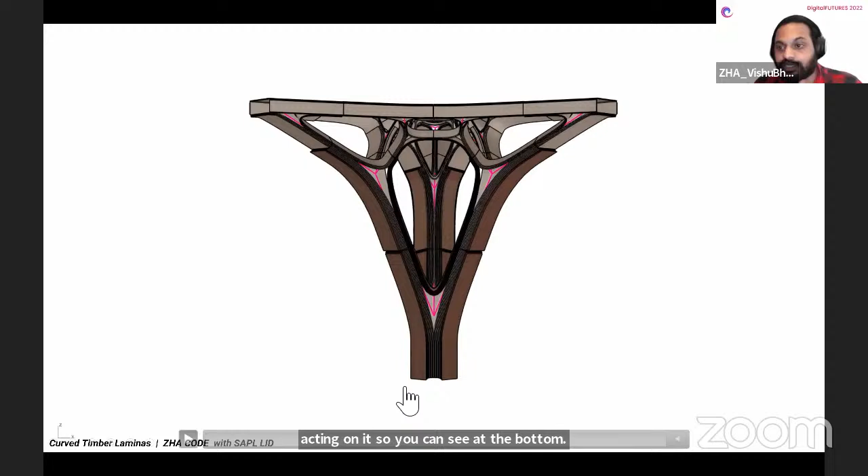And as you can see, because through graphic statics we are aware of what is the force acting in each part of the structure, the number of laminates was varied as per the force acting on it. So you can see at the bottom, where the forces are high, it is the thickest, and where the forces are less, it becomes thin.

The aspect of procedurally generating geometry through these volumes or polyhedra is an inherent property for these geometries to be developable. That means all of these sheets can unroll into flat sheets, and they can be cut with an inexpensive 2D laser cutter, which was done at the University of Calgary.

And to register the curvature back in the physical, an actuator tool was developed at the University of Calgary by Alicia and her team, where they registered each of the nodes and the curves for all the 3D geometries. This was assembled over 4 to 6 hours at the University of Calgary.

And you can see the video playing it through. First, initially, the top part was done, and then subsequently, the remainder strips, which were split into 24 nodes, were assembled and then flipped in the space. So it was done over the period of the workshop, in like a week's time.

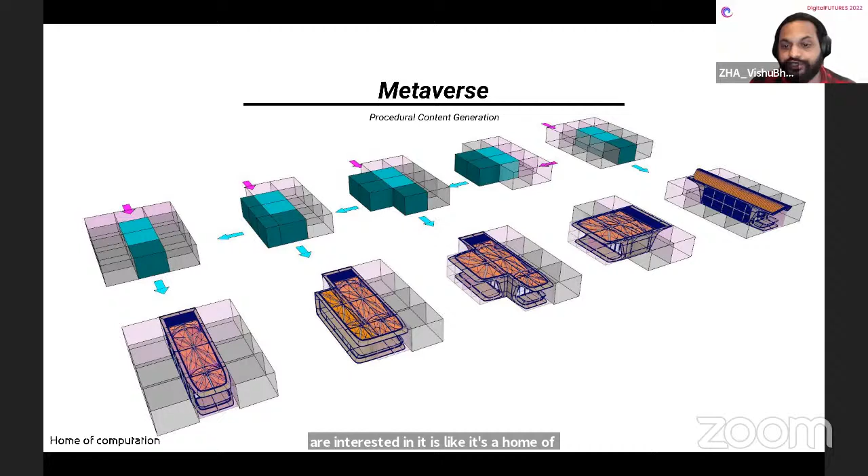The second domain I would like to look into is the current buzzword everyone's interested in in the design industry, which is metaverse and cyber physical spaces. Why, on the computational side, we are interested in it is that it's a home of computation. It allows for procedural content generation, and it's natural for people interested in computational design to intersect with the paradigm of metaverse.

It also allows for parametric tectonic variations, so the buildings can change over time, and this is inherently possible when you're integrated with computational tools. The more important aspect why we're looking into metaverses is user content generation and customization, involving the user to make decisions and also to generate content.

And the fourth one is that it has high fidelity images, and that's one of the reasons why we are also looking into game engines, which are aligned with the metaverse pipeline. Learning from quite a few commercial projects such as Liberland, which is like a simulation preparing for the physical realization, but simulated in the digital world. This was creating a master plan.

The design sense is very different to the current precedents out there, like Decentraland, you can see on the right. But we are trying to bring in our design languages and give a hierarchy of spaces, which is inherent in any master plan if we did it in the physical world as well. And trying to have these markers which become landmarks from which the city can grow.

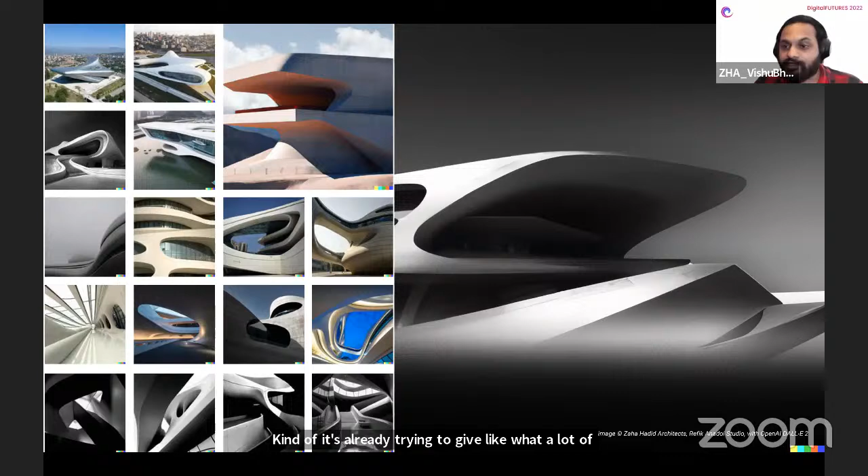What we were looking at here was to use DALL-E 2 to create architectural spaces. As we all know, it's already trying to give quite a lot of coherent architectural spaces. But what we were trying to look at was how we can make this into an inspiration for design, and trying to use these outputs from the design and data in converting into 3D spaces, which can then be detailed out by the designer.

This is kind of a teaser, which we did in collaboration with the Refik Anadol Studio, looking at data and StyleGANs in the initial part of the research, but then subsequently moving on as DALL-E 2 was released. We looked into DALL-E 2 and trying to convert the images coming from DALL-E 2 into these kind of 3D spaces, and also developing the tectonics associated with it. This exhibition is currently on, so if anyone listening is from Seoul, please go and visit the space.

Yeah, other commercial projects we are currently in that domain look into NFTism, and it's also an exciting period for designers in the sense that we're able to design for gameplay and also for PUBG, in this case looking at the first-person shooting game, and how computational geometry can actually enable us to navigate the space better. These kind of things were integrated into the design pipeline.

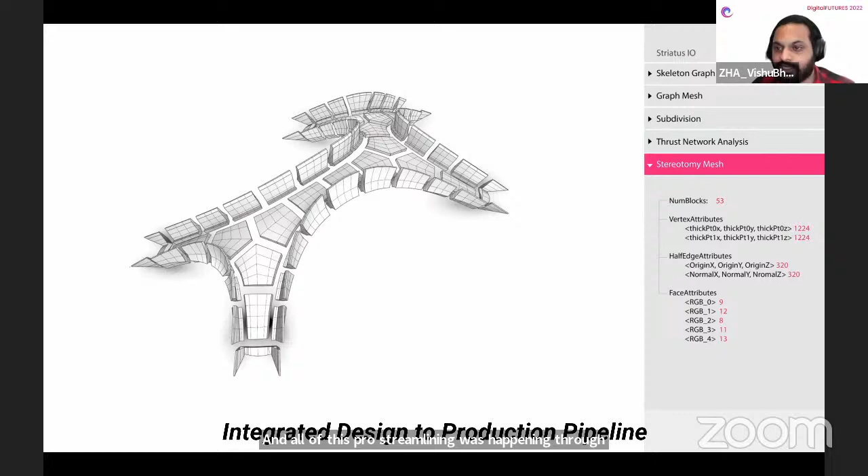And all of this streamlining was happening through an integrated file format, which we developed for the project, with all the stakeholders using the same file format, which you see on the right side, showcasing the attributes which are getting captured at each stage of the project. In this case, looking at signed distance fields and their associated functions, and then looking at the fabrication aspects and the G-code. Everything is embedded in the same file format so that it is much more streamlined. In the next step, we are also trying to capture the fabrication assembly aspects of this into the same file format.

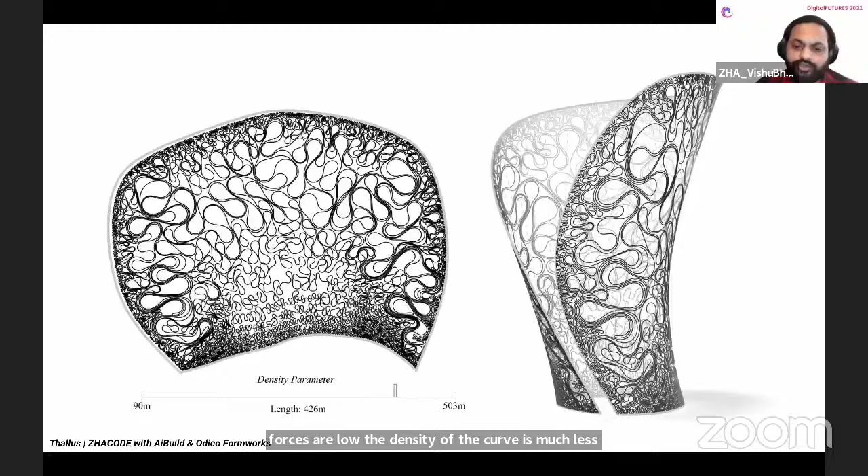In a similar sense, looking at Thallus, which is another collaborative project with AiBuild and Odico Formworks. Similar generative tools, trying to use generative algorithms to position material where it's only required. So you can see the density of the line in this case would change based on the structural forces. At the boundary where the forces are high, the density of the curves would be higher, and where the forces are low, the density of the curve is much less. So this one is using an algorithm called differential growth and also a curve fitting algorithm into a given 2D space.

Similar techniques like developability and topology optimizations have been explored in a wide range of other demonstrators, in this case with one-to-one and UAP, with Block Research Group and Architecture Extrapolated, looking at fabric formwork and concreting, high resolution 3D printing with Stratasys, and looking at stone stereotomy and carbon fiber with Generali and AKT II and New Fundamentals Research Group.

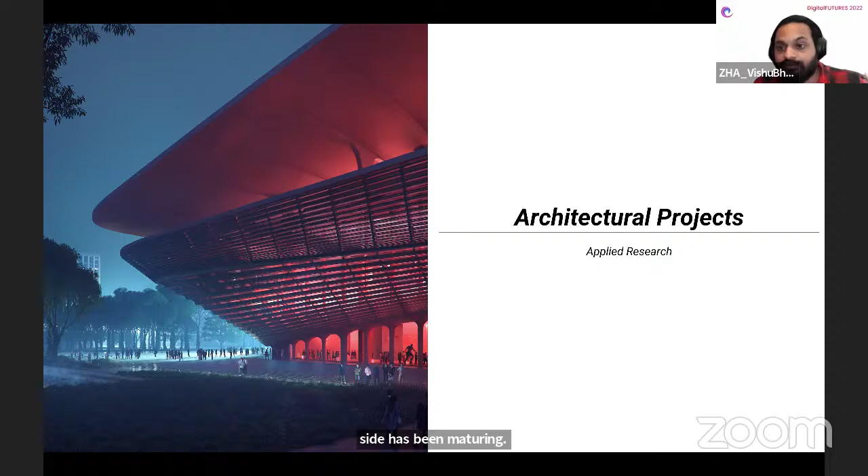Overall, as this technology for the design side and the fabrication side has been maturing, we have been able to see this applied into a wide range of projects within the office, of which I will focus on the stadium project, which is almost nearing completion and set to open in Xi'an in October. All the form finding things we learned from early pavilions are now making it into large span roofs at the stadium, looking at facade systems and tectonics of paneling.

Also the design methods for early stage design to iterate through a lot of different metrics and design iterations were applied. And the knowledge of building these prototypes has helped us to negotiate better with the structural engineer through our own form finding tools. We are looking at trying to reduce the number of elements and also reduce the thickness of the cable net.

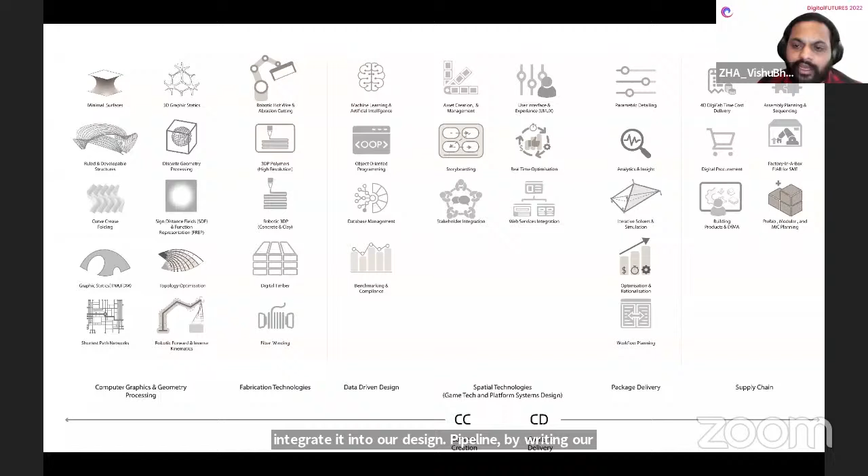And it is divided into 2 parts. One at the early conceptual stage, which is the content creation stage, and the later stage where we want to deliver the content. And the framework is powering all of these different stages of a project and all of the different projects within the office. Our core framework, as I was mentioning, supports all the softwares which are available in the office, predominantly Maya and Rhino, but also speaks to Python and BIM on the other side.

Apart from powering a lot of the technologies we just saw, it is also looking recently into sustainability and incorporating solar analysis into early stage design. So you can see here, using GPU computing, in real time as the designer is modifying the low polygon geometry in Maya, they're able to get real-time feedback of the analysis. This is just an example: if the mesh had about 10,000 faces, it's doing about 45 million calculations in real time. And that is becoming really powerful. And this tool is getting further developed to include all the other aspects of sustainability.

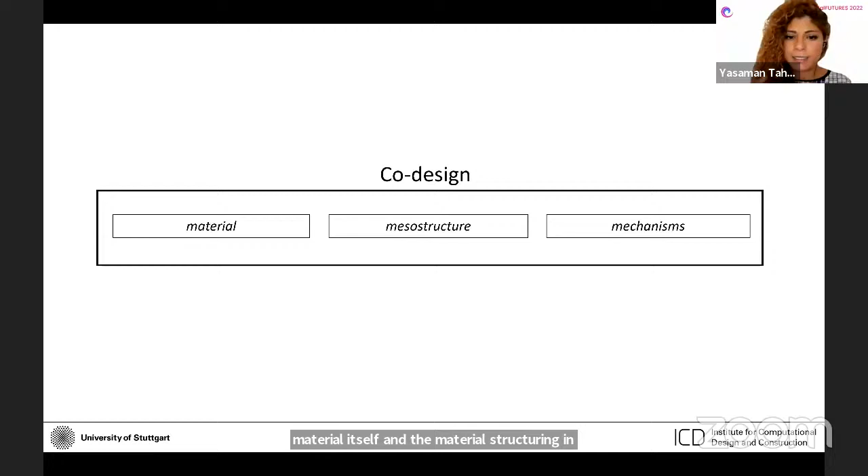So the overarching hypothesis of my work is that if we can do the same, if we can somehow co-design the material itself and the material structuring in different length scales, we will be able to create the same functional, self-shaping, shape-changing structures. By material, we need to build materials with this inherent stimuli responsive property, for example, hygroscopic property.

At the same time, materials should be able to be processed with digital and computational fabrication processes that we can then use to define the mesostructures of our larger structures. And the mesostructuring is what we can actually use to embed and encode the logic of shape change. And then lastly, we talk about the mechanisms, which are these larger systems that can create functions for us. And these last two can be precisely designed and fabricated using computational fabrication processes.

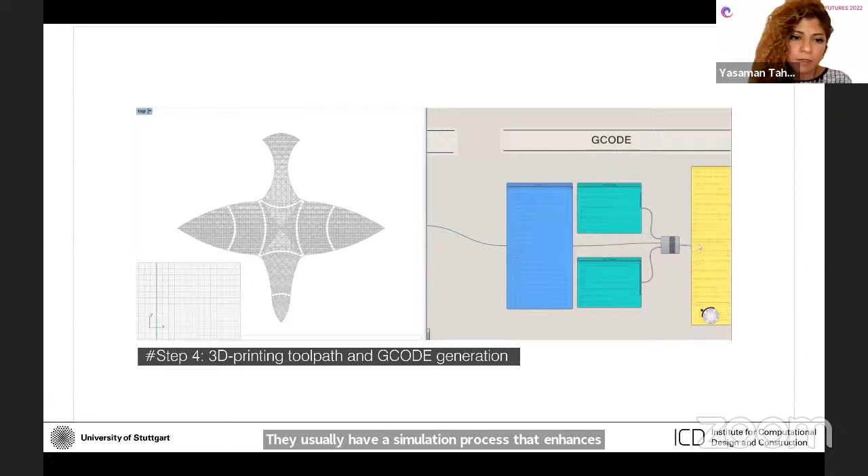So specifically in my doctoral research, I use 4D printing, which is 3D printing using stimuli responsive materials. And while the hardware that I use, the 3D printing machines, is pretty standardized, I use computational design workflows to develop this fabrication process. They typically start with defining material structuring. They usually have a simulation process that enhances designing shape-changing structures, and it leads to toolpath generation and then automatic generation of G-code, which can then be used on normal desktop printers to create these 4D printed structures.

So in the rest of this presentation, I'm gonna show you 3 studies, each of which focuses on one of these aspects that I just introduced. So the first study is on materials. This was a collaborative project that we did with the help of material scientists from the Institute of Plastic Technology at the Stuttgart University. And our aim was to develop 3D printable filaments that are highly hygroscopic and that can help us create highly responsive humidity responsive structures.

So to create these kind of materials, we looked at the basic elements. We looked at pure cellulose powder as the hygroscopic agent, and then we mixed it with a matrix of bio-based polymers. And since we could pick the percentages of each of the cellulose and the polymers, and we could also use different polymers, we could really define the properties of the materials that we were creating. Properties such as hygroscopicity, stiffness and flexibility.

And then this led to creation of a palette of different filaments, each with different properties, that we then tested thoroughly. And at the end, it let us create structures, as you see one example of on the screen, which were highly responsive to the humidity in the air. So with slight changes in the humidity that correspond to the humidity changes during day and night cycles, these structures could fully open and close. And further on, we also tested these structures for long-term performance to see if they can perform the cyclic motion over many cycles, as a pine cone can do.

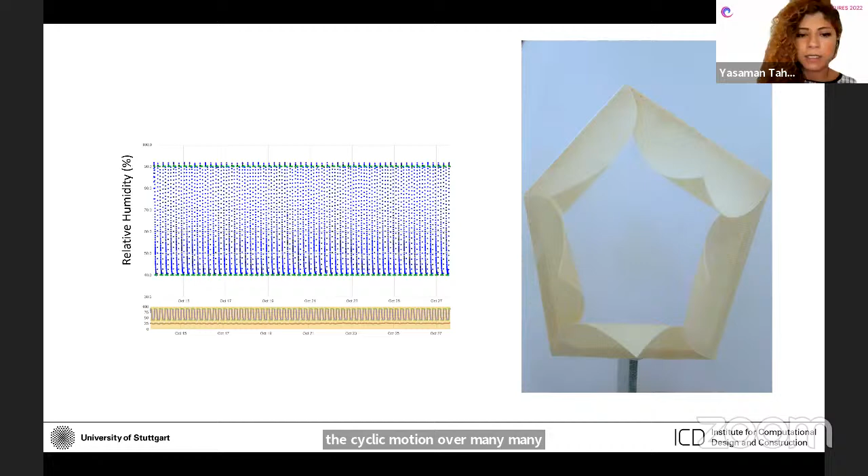The next study is focused on the mesostructure. Here we were really looking at how we can fully program the shape change, not only spatially, but also temporally. So here with this project, we were collaborating with the biologists and the material scientists.

And the biologist brought us this great inspiration of a plant. This is called the silver thistle, a plant that you can find in the Alps. And when it rains, it closes these little silvery thistles to protect the pollen. But what is super interesting is that not all of these flaps close at the same time, but they're closing sequentially, some of them first and some of them later.

So then this was kind of a challenge in our mind, how can we create the same thing in 4D printing? So then we looked very deeply at the parameters that we have in 3D printing, 4D printing, parameters such as layer thickness, the filling ratio, the porosity, etc. And then we did a wide range of tests on the samples that we produced to see what is the exact effect of each parameter on both the bending curvature and the time scale of motion.

And then through these experiments, we came up with some conclusions on the exact effect of each of these parameters, which can be used to create such a demonstrator piece that shows an aperture where, sorry, the video is a bit twitchy, each of these flaps is bending in a different time scale, some of them much faster and some of them much, much slower following in later sequences.

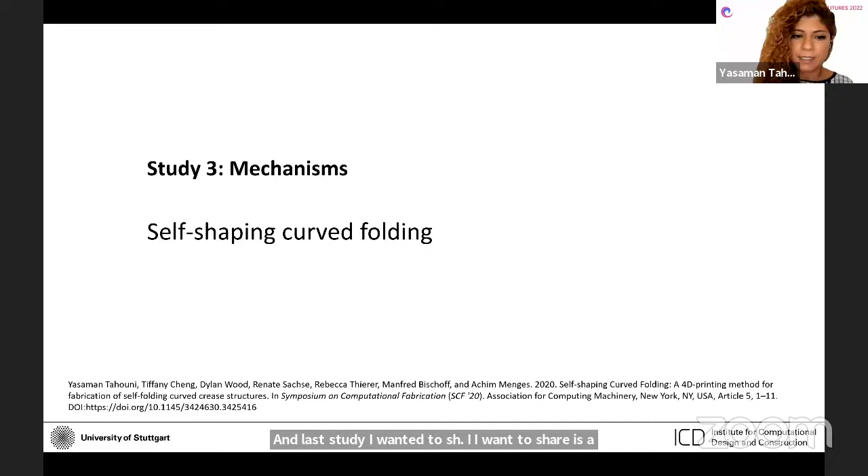And the last study I want to share is a study on the mechanism. Specifically here, we looked at the self-shaping curved folding mechanism. So curved folding or curved crease origami is a specific type of origami that instead of folding a sheet on a straight line, it folds a sheet on curved lines. And this results in very beautiful and performative 3-dimensional geometries.

But the problem is that these structures are really hard to fold by machines, robots, and even by hands. So here our idea was to use shape-changing material systems to create self-shaping origami structures. These structures use the same bending mechanism principle as the previous elements I showed you.

But through specific arrangement of the bilayers and through using flexible materials on the hinges, we could create this 3-layer structure that folds upon changes in the moisture content. And of course, since we're dealing with 4D printing, we can really precisely program, for example, the folding angle on each of the fold lines through specifying the 3D printing parameters, for example, the toolpath spacing.

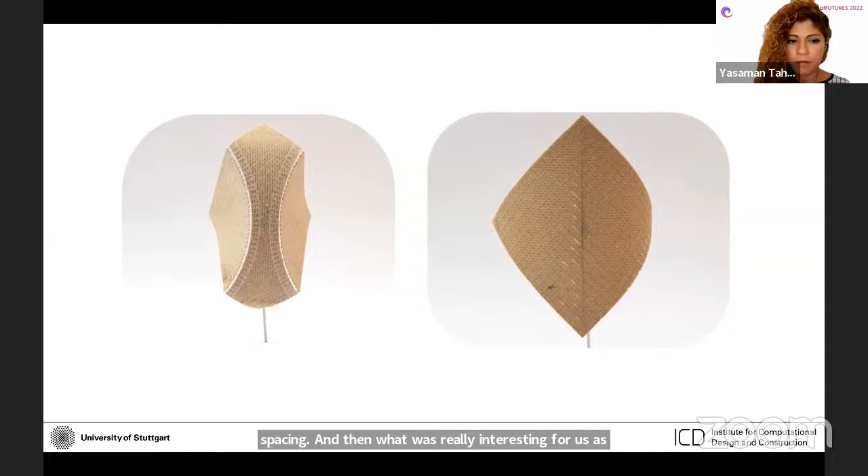And then what was really interesting for us as a kinetic system, just using this type of mechanism, the curved folding mechanism, allows us to create a huge motion amplification effect. For example, here you see 2 structures, one with and one without the folds. You see that the structure with the folds can achieve much larger opening.

And now with the system, we are not really just confined to simple modules, but we can actually create complex origami tessellations, such as what you see here. Again, the self-folding is completely in the material. All we needed to do with the material that I was using for these prototypes was to put it in a tray of water for half an hour and then let it dry at room temperature. And as it dries, it self-folds into its shape.

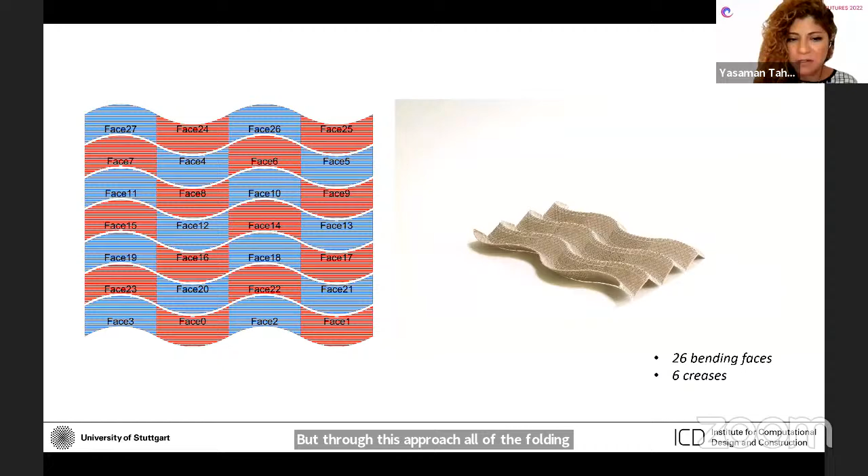And I just wanted to pause for a second. Think about the structure with that many folds that you just saw, how difficult it is to fold with the hand or with a machine. But through this approach, all of the folding effort is just on the material structure itself. And then of course, using the computational fabrication workflow, we can implement it on a wide range of geometries and create all types of self-folding curved folded structures.

In terms of the current and the future work, at the moment with our colleagues at the Material Programming Group at ICD, we are working on transferring this technique into architecture and building construction, and hopefully show it in a building demonstrator project that will be finished this fall 2022, where the smart shape-changing elements are used to provide adaptive shading in response to weather conditions.

So I tried to show in this presentation how this co-design method of materials, mesostructures, and motion mechanism can allow us to create multifunctional structures that adapt in response to their environment. And hopefully this research will be a step to create a future built environment that is more performative, adaptive, and in tune with the environment, and being empowered by, and at the same time, empowering the earth.

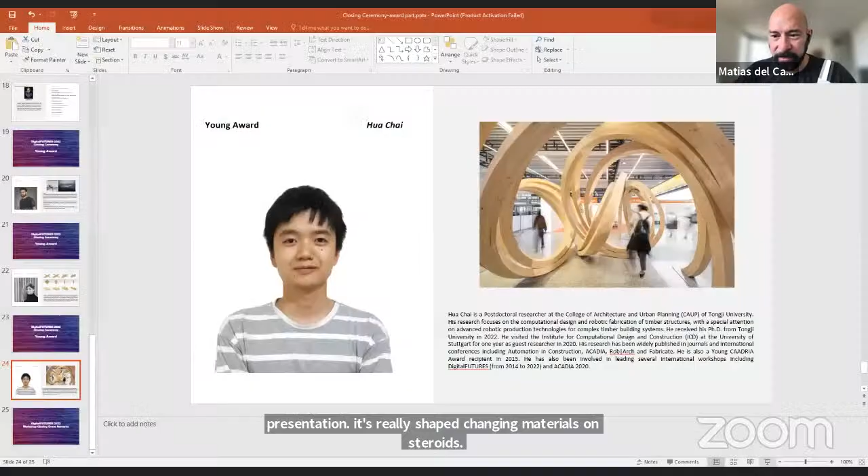And last but absolutely not least, I would like to invite Hua Chai to present his work. He's a postdoctoral researcher at the College of Architecture and Urban Planning of Tongji University, and his research focuses on the computational design and robotic fabrication of timber structures with a special attention on advanced robotic production technologies for complex timber building systems. He received his PhD from Tongji University recently in 2022.

He visited the Institute for Computational Design and Construction, the ICD in Stuttgart for 1 year as a guest researcher in 2020. And his research has been widely published in journals and international conferences, including Automation in Construction, ACADIA Conference, Rob|Arch, and Fabricate. He's also a Young CAADRIA Award recipient in 2015. And he has been involved in leading several international workshops, including Digital Futures from 2014 to 2022, and one workshop at the ACADIA Conference 2020. With no further ado, my sincere congratulations to you also, Hua Chai, for the award, and I'll pass on to you.

Okay, it's really a great honor to be rewarded this Digital Futures Young, and a big thanks to the Digital Futures organizing committee. And actually, I just got my PhD under the direction of Professor Yuan and Professor Achim Menges. And today I will show my research about the platform-based robotic timber construction.

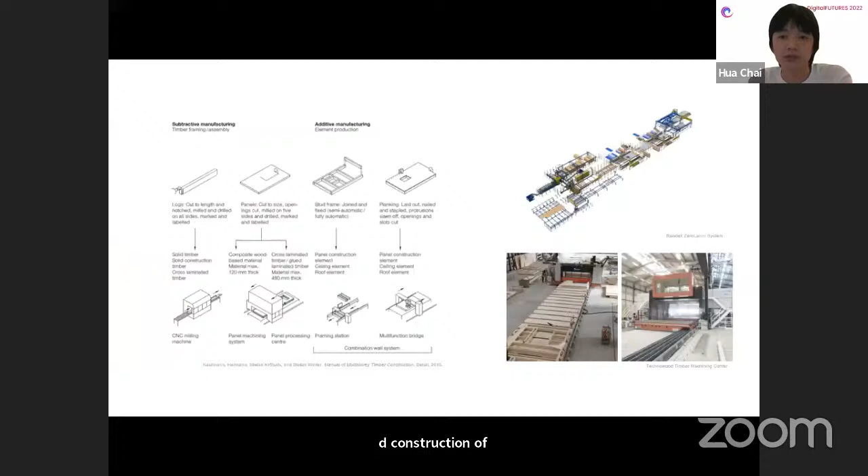So after these various explorations, my research attempts to think about how to combine the robotic fabrication technology in the academic field with the wood construction industry, which nowadays particularly stresses the advantage of this automated prefabrication process. And actually, I noticed a new trend is the robotic construction platform, which is developed to migrate the innovation in the academic field into the industry by integrating the cutting-edge achievements in robotic fabrication and trying to redefine the construction process.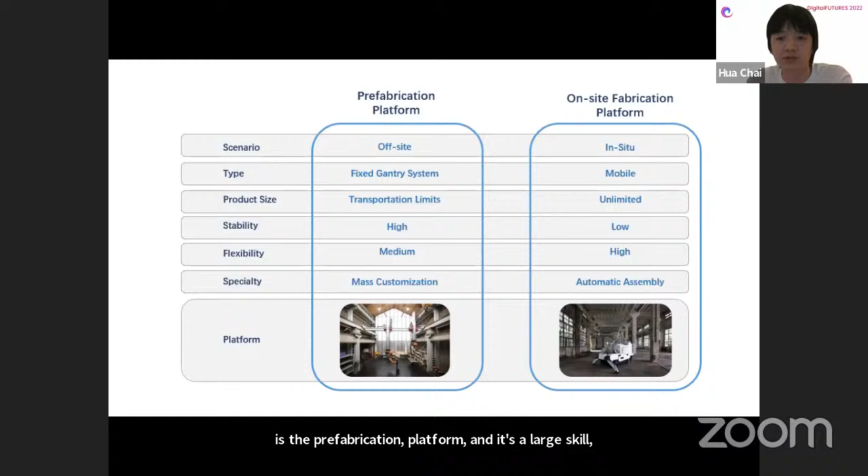So in this context, our team here in Tongji University attempted to rethink the potential of timber construction with two types of robot platform for both on-site and off-site construction. One is a prefabrication platform, a large-scale fixed gantry system designed for mass customization. And another is a mobile robot platform, which could move freely on-site and conduct automatic assembly tasks.

And at the same time, we are also interested in exploring the interaction between the robotic fabrication platform and the building system by developing a lot of different kinds of new solutions for timber construction.

And first, I will introduce the robotic prefabrication platform, which is initially developed by the team of Professor Yuan in collaboration with Shanghai Fab Union since 2015. This is a 3-axis gantry system equipped with 2 KUKA robots, and it provides sufficient capacity for large-scale fabrication.

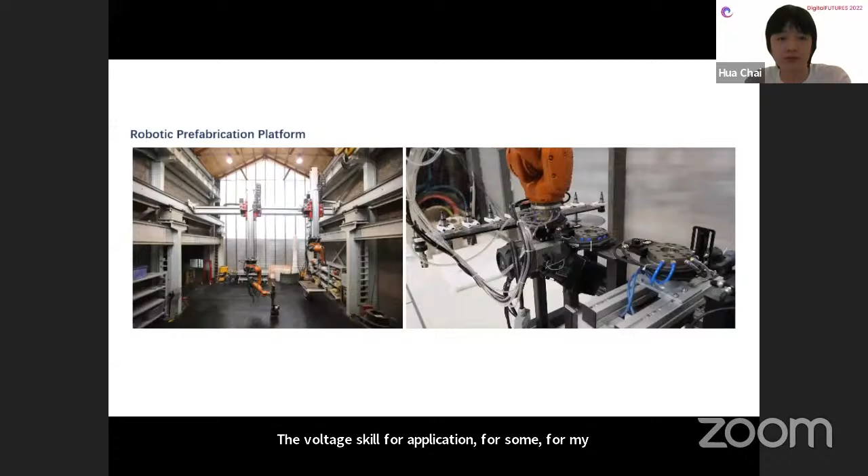For my research, I try to develop a set of robotic fabrication effectors for timber fabrication and integrate them as a tool library. And also, I try to integrate a set of infrared camera systems, which give the platform the ability to see, and which is used for high-precision positioning of the robot and also the materials.

So with such a robot platform, we try to take advantage of it to deal with different challenges of complex glulam structures. This project, called Nomadic Wood, is an installation developed in 2019 for an exhibition in Shenzhen. This installation is designed as 9 free curved wood beams intertwined with each other, and all the elements are double curved with torsion.

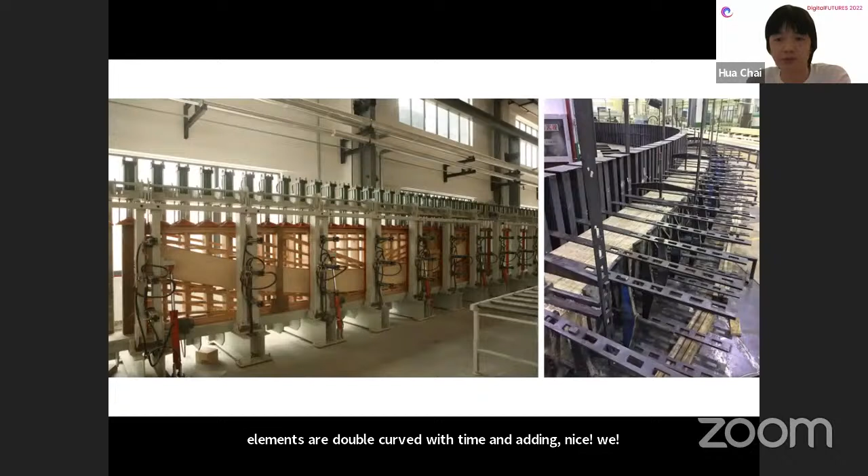As we all know, straight and single curved glulam can be produced with current technology in the industry, but there is still no efficient way to produce this kind of double curved glulam component. So we employed robotic bandsaw cutting technology, which can cut ruled surfaces with high efficiency and accuracy, and which has also been proved to be a feasible solution for double curved glulam production in previous research.

So in this project, we divided each long beam into 8 segments, and each double curved segment is expected to be cut out of a single curved beam with a minimum volume that could cover the target segment. And since each segment is a different double curved one, the production of the segments is a major challenge in this project.

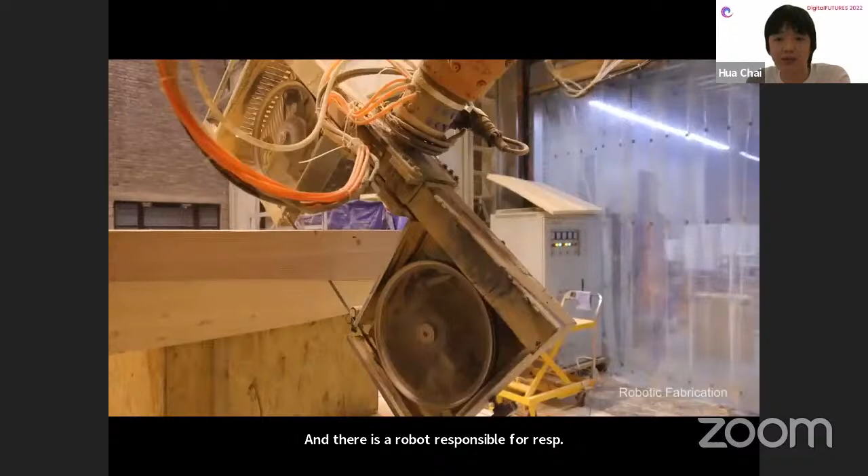We try to make full use of the dual robot system, and the robots could perform all tasks in one workflow with the orderly organization of the bandsaw cutting and the spindle milling. The two robots are responsible respectively for cutting and joint milling, with one robot equipped with a spindle and another operating the bandsaw effector.

And also we are interested in traditional crafts like timber joints. In this project, we are inspired by the traditional joint called a scarf joint, which is a common way to join two wood beams end to end. It's employed here to reconnect the short members into a continuous glulam on site. This project is our attempt to demonstrate the ability offered by the robot platform in handling mass customization of a complex structure through multi-process integration.

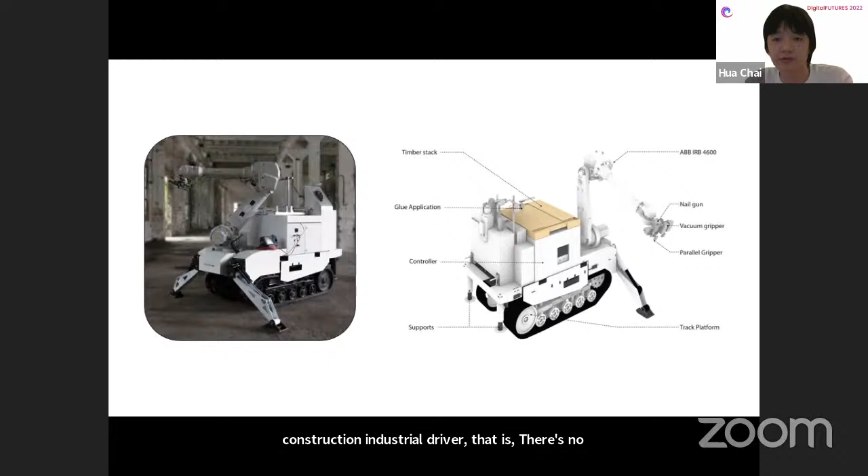The second part of my presentation will be focused on the robot platform that addresses the problem that the timber construction industry relies on prefabrication. There's no on-site fabrication system for timber structures that could be comparable and competitive with the flexibility of on-site cast concrete structures. So in this case, a mobile platform is developed to be flexibly deployed for various timber construction tasks on site. The reach envelope of this platform is designed to cover the typical floor and the typical height of a floor and ceiling.

The gripper with the automated nail gun is mounted on the robot to conduct assembly tasks, and a gluing station applies the glue during assembly. So with this setup, the timber structure could be robotically assembled on site from discrete timber elements through a continuous repetition of first localizing itself on site, then gripping beams and applying glue, placing the elements and finally nailing them in place.

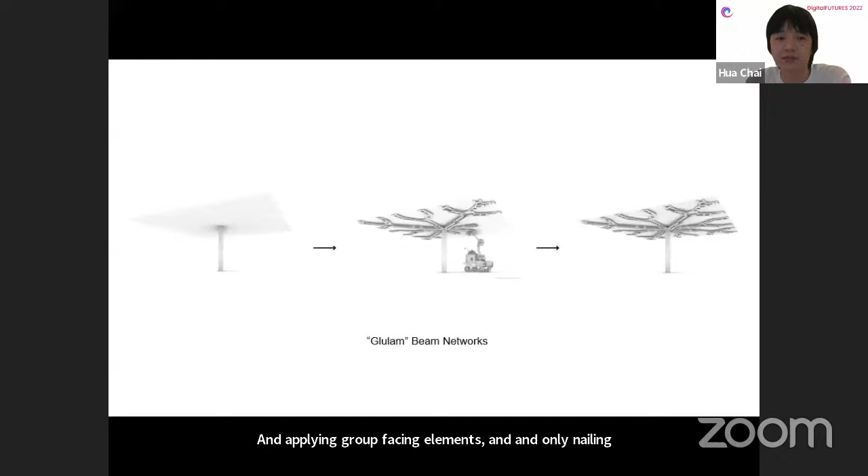So based on this kind of nail-glue hybrid connection, which can be regarded as an extension of the common concept of glulam components, we first designed and conceptualized a building system called glulam beam networks, which is assembled by the robot on site to reinforce the timber slab underneath. At the heart of this building system is the development of a material efficient network, which is compatible with the capacity of the robotic fabrication platform.

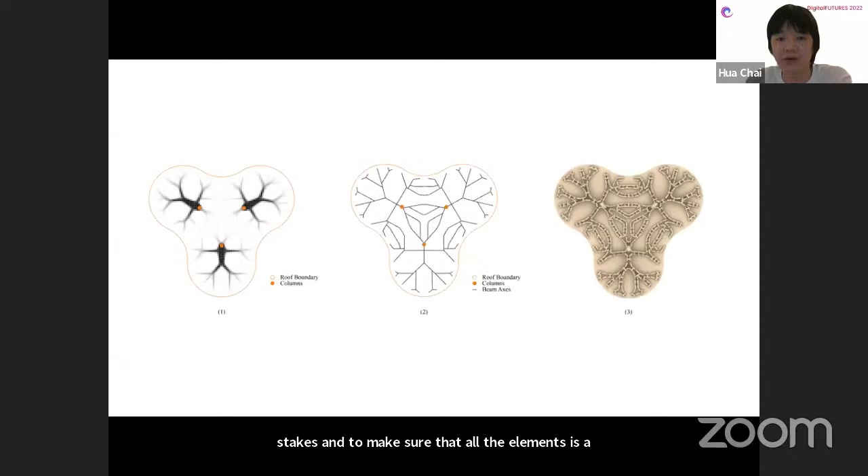The computational design of the beam network takes the result of a topology optimization, and then the axes are extracted, and an agent-based modeling system is used to generate the different stacks and to make sure that all the elements are compatible with robotic fabrication constraints.

We also developed a case study pavilion last year as a demonstrator to test the proposed beam network system. This pavilion was also in collaboration with Fab Union and the ICD Stuttgart. The pavilion consists of two CLT roof panels supported by 8 columns.

First, the prefabricated columns and the CLT panels will be installed in place, and the robot will be moved on site to reinforce the panels from underneath and assemble the discrete sticks into a continuous beam network from below. So this is a processed roof panel being hoisted in place. After that, at the construction site, the robot platform will first localize itself by recognizing the pre-laid markers on the CLT panel with the Intel RealSense camera that is mounted on the end effector of the robot.

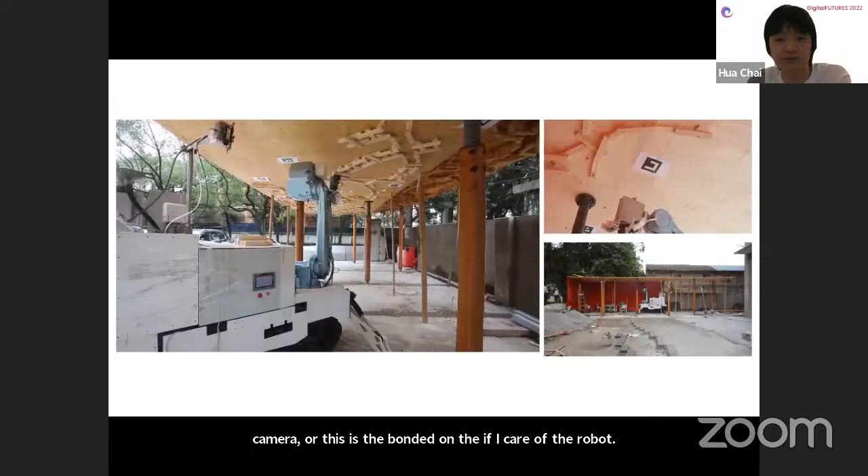After that, the robot will grab elements from the storage, apply glue at the glue station, then place the element in place, and finally fix it with multi-nails. The final beam network reinforced roof actually achieves a maximum span of 5 meters with a thickness of only 60 millimeters.

We think this research could be a valuable starting point and also a valuable reference for more flexible design and construction of multi-story timber buildings, which could effectively expand the design freedom with this high adaptability to different floor plans.